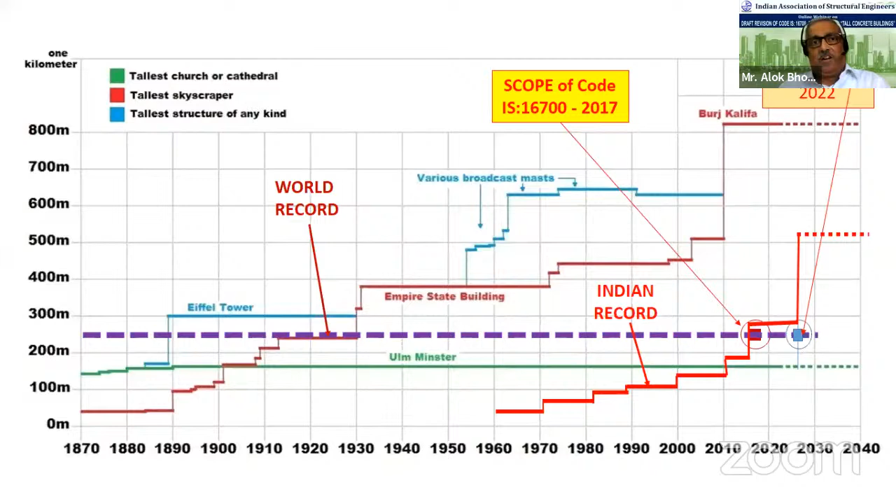With this brief background, let me come back to today's agenda. The objective of this webinar is really twofold. Firstly, it is to apprise the participants, who are mostly code users, of the modifications that are proposed in the code, which is currently in wide circulation. The aim is to go into the details of the proposed changes, collate all the comments and observations made by the panelists during this panel discussion today, and forward all the observations to the BIS code committee for their consideration.

The second objective is to discuss broadly the expectations of practicing engineers and code users for future growth of this code. The buildings are going to be more and more complex in shape. We know that we have very little control on the shape of the buildings that are coming up, particularly in the tall building sector. We are seeing many twisted buildings on the horizon, and we have no way to stop this.

The only thing is the structural engineers, we can no longer be a kind of a roadblock or a stumbling block in the progress, and keep our codes restricted, thinking of only what capacity we have. I think it's a question of chicken first or egg first. And this is a debate which I think in the panel discussion we will also discuss. What is the future of the code?

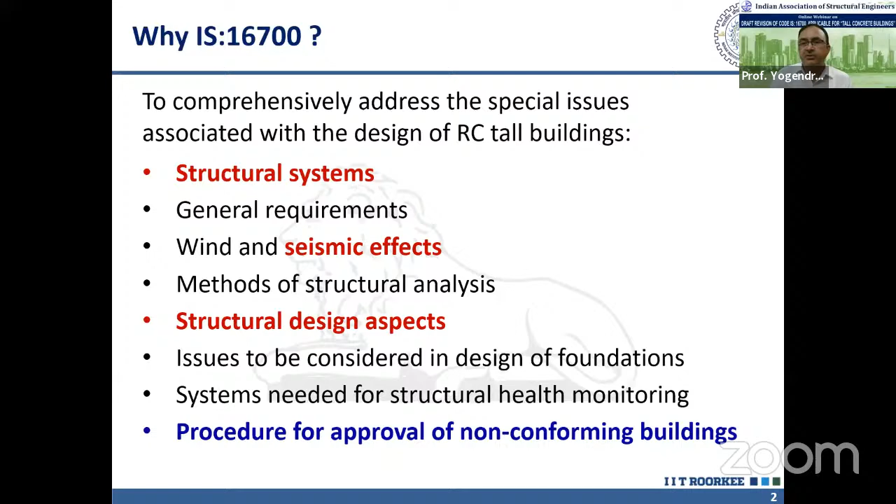So also what this code does not cover is specified in the scope. This standard is not applicable for tall buildings located in near field of seismogenic faults. So what is near field? Which is within 10 kilometers from the known faults. And there is always a query: how do we know where the faults exist in our country? So I can inform here that the Geological Survey of India, GSI, has published a seismotectonic atlas of the country, and that atlas gives maps of all the known faults so far. So from there we will come to know where these faults are and whether our building or any other structure is in the near field, within 10 kilometers of those known faults.

So the code says that in that case it is not applicable. But what exactly is to be done when it is within those 10 kilometers is not very clear from the code. One thing which is to be done is that in near field we have to go for site specific hazard assessment. And as far as I think, the rest of the design considerations will remain the same. The only thing we have to keep in mind is that when the building is within 10 kilometers, we have to go for site specific hazard assessment.

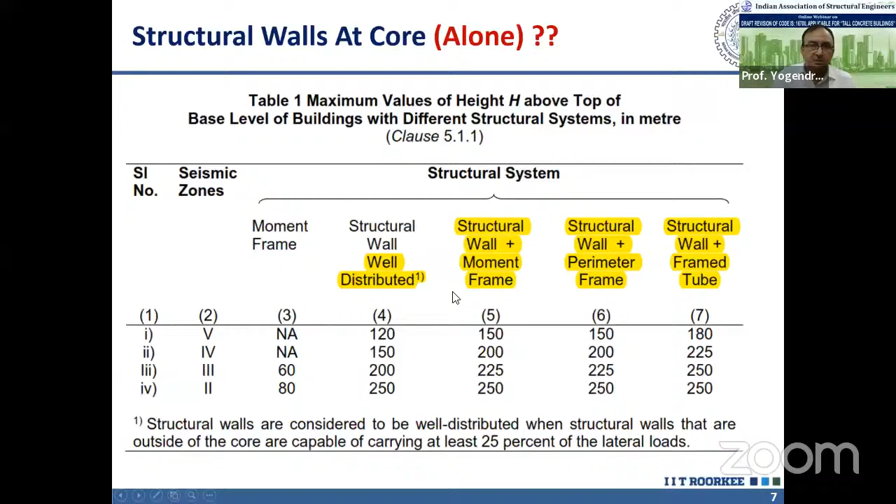The source of this formula is ASCE 7-22. In ASCE 7-22, different types of structural systems are identified, and the two systems taken here are concrete moment resisting frames and all other structural systems.

So the same expression is multiplied by a coefficient Cu, which depends on the seismicity. For PGA greater than 0.3 and 0.4 G, these values are 1.4. So in proposed IS 16700, this value of 1.4 has been chosen, and accordingly these two expressions have been given. The commentary of ASCE 7 also provides the basis for how these values of 1.4 to 1.7 are to be chosen.

That depends upon the seismicity of the area, because in less seismic areas, the sizes of the beams and columns are expected to be smaller. The building is expected to be more flexible, and as a result, the period will be longer. And this larger multiplication factor is allowed.

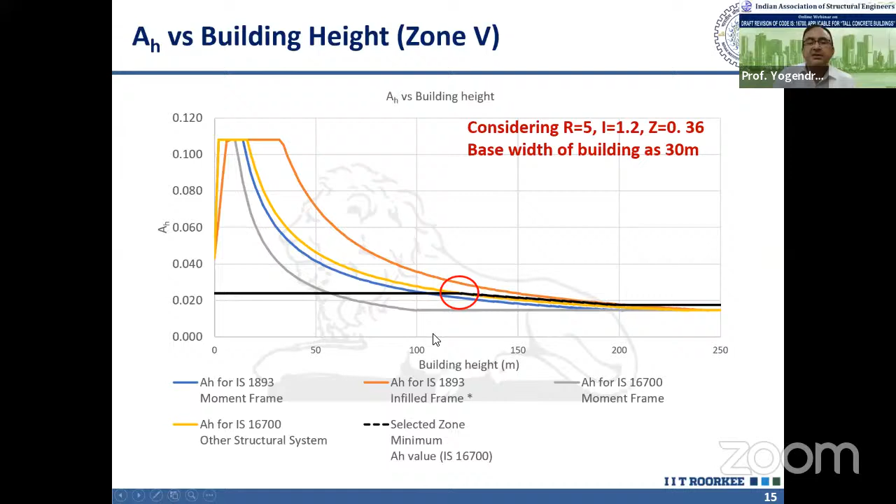Then there is an issue of what will happen just at the 50 meter mark, because less than 50 meters IS 1893 is applicable, and beyond 50 meters it will be IS 16700. So we have to look for similar changes in IS 1893 also, so that the design from the two codes is consistent.

And in this regard, if we are using 16700 for buildings less than 50 meters, as the code says, actually it is not adding value, rather it is reducing the design force for buildings less than 50 meters.

We can do a little simplification, and if I rearrange these terms, actually the origin is from ASCE 7 again. In ASCE 7 there are two limits given on interstory drift - one coming from the stability point of view, from the P-delta effect, and the other coming from the damage point of view.

So this stability limit, if I rearrange a little bit, it becomes delta-i by hi, where delta is the interstory drift and hi is the story height. So it becomes the interstory drift ratio, which is given as 0.4% in IS 1893.

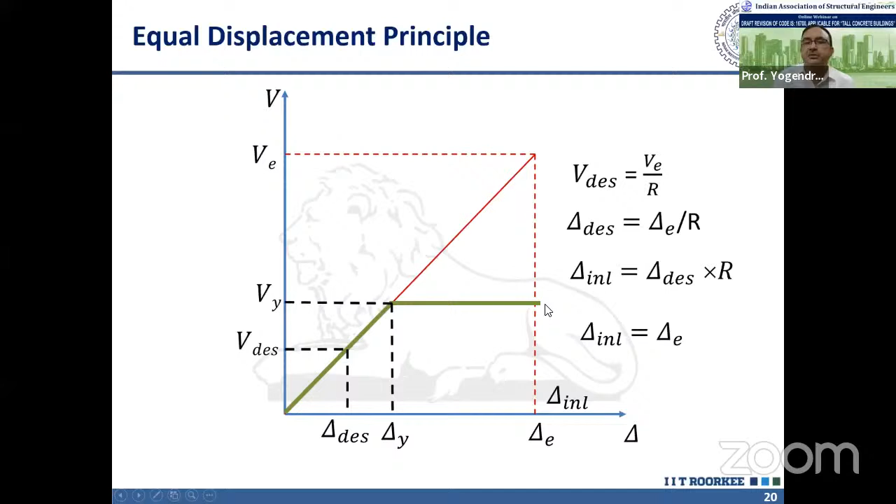So it is my understanding, looking at the code, that the code has confused between the two drifts - one is the inelastic and another is the design. In our code, we are dealing with the design drift which comes for the reduced force, whereas in ASCE 7 it is the inelastic drift, and using equal displacement principle, this inelastic drift comes R times the design drift, and that's why it is perhaps required to remove this R from here.

In case of ASCE 7, another drift limit is provided, coming from the control of damage, and for all other structures, depending on the importance, it varies. The inelastic drift varies from 2% to 1%. So if we take the limit of IS 1893, 0.4%, and multiply it by R, then that becomes equivalent to 2%, whereas in case of ASCE 7, it is also equal to 1% for important structures.

And this will depend upon also what type of partitions are provided, how much damage is acceptable in the structural and non-structural components. So something similar we have to provide in our code.

To conclude, three changes perhaps we can recommend in this revised draft. One is the freedom to select the structural system. Currently in our code, the structural system is binding - beyond a particular height, we cannot use a particular system, although there is no scientific basis for that.

As we know, Taipei 101 is a mega frame building - one of the world's tallest buildings has been using the concept of the frame. So there should not be a limit. There should rather be a suggestive range, that in this range this type of structural system is more economical or more viable. That type of recommendation can be there in the code.

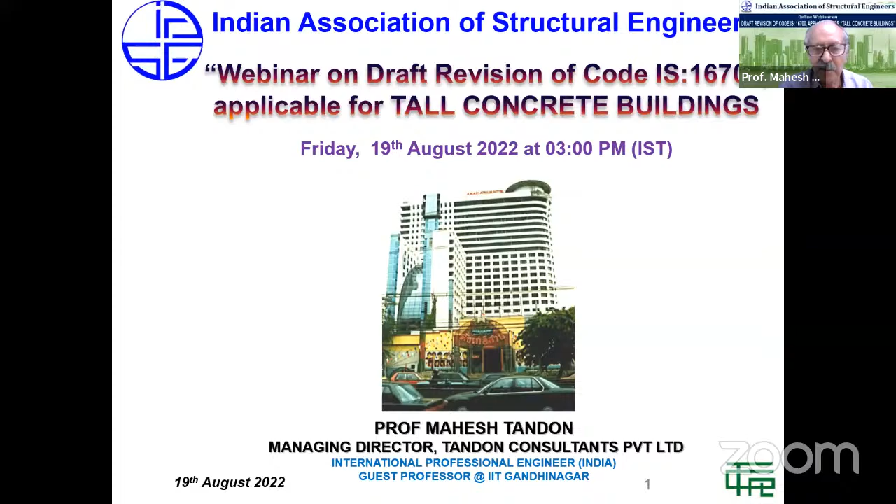Okay, thank you. Thank you very much, Alok, and good afternoon to all the participants and my fellow panelists. I will limit myself to these two chapters, although I would have liked to discuss some other things also, but I'm sure we'll get a chance to discuss those at the end after all the presentations are made. So the first thing is, without too much repetition, this is part of the code on structural walls.

This part has been removed from the code. This is the old code which I'm showing you, and I will show you the new code. So this vertical column has been eliminated.

The other thing, as you can see here, that has gone for a wall. The other thing I would like to say is that they should reconsider the nomenclature which they have put here. Whatever nomenclature they want to use, my suggestion would be to use a nomenclature which is generally known and published everywhere, and there should be a figure which describes what we mean by all these nomenclatures.

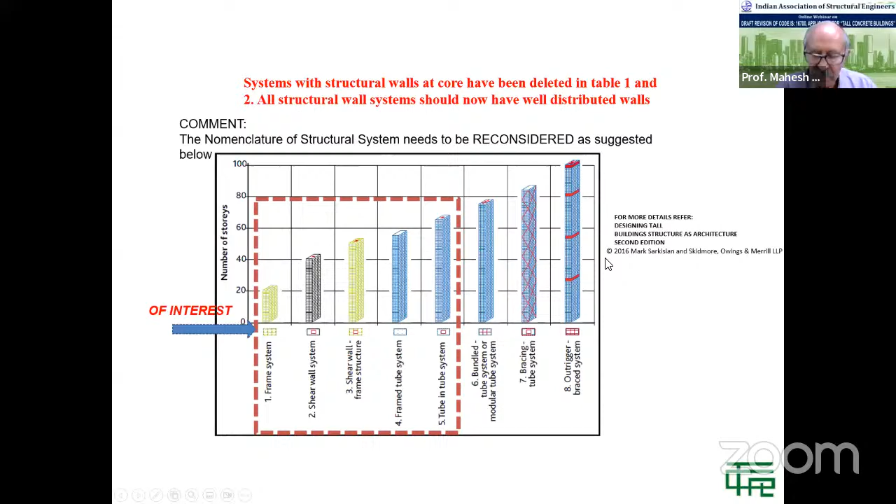You see this building, for example, you have very closely spaced columns on the cladding or on the surface of the structure. And if you see it in plan, there is the core, which also has a function, and you've got very closely spaced frame columns, as you can see here. Of course, every floor you have a connection. So it's a different type of building, it's not merely some frame building. This is what we need to use, the wordings which are commonly understood, and also give a diagram of what they look like.

I think Professor Yogendra Singh mentioned about this drift under natural conditions, yeah. So the change is that it used to be a return period of 50 years when calculating natural drift, and now they have made it 20 years. I have looked at the international codes of practice, and it seems to be more or less okay, whatever change they have made.

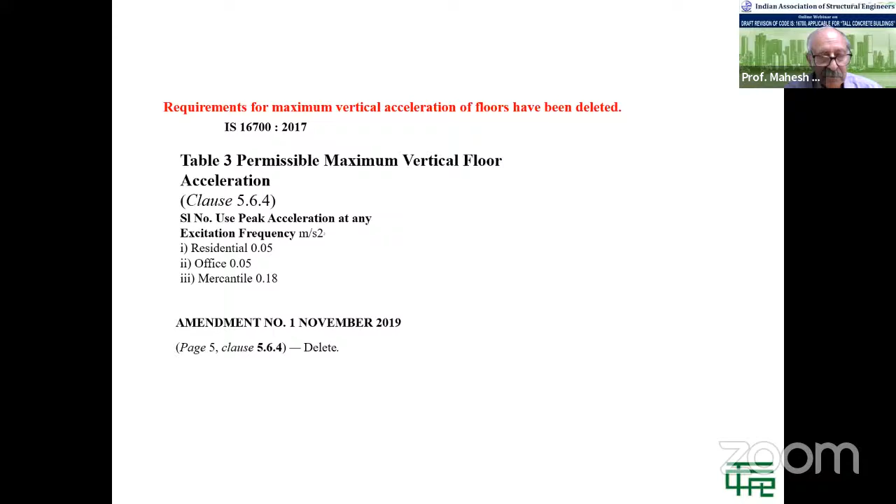The other thing that has changed is the lateral acceleration limits for residential buildings. The peak combined acceleration was 0.15 meter per second square in the old code, which has been made into 0.18 meter per second square in the new code, which means it has become a little more liberal to the extent of the limit.

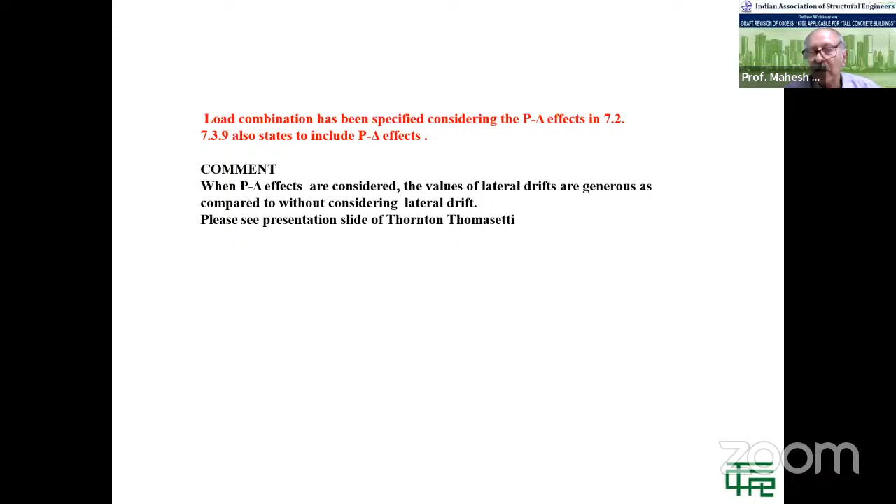I have already talked about the P delta effects. It's actually outside my terms of reference, but in 7.2 and 7.3.9, they also said to include P delta effects. But when you consider P delta effects and when you don't, these two have to be treated separately, and the return periods and the limits have to be defined properly.

So it should be specifically mentioned that this clause 6.2.2 applies only when you have buildings which are mentioned in 6.2.1, which means complexities in plan, site complexities, and so on, and natural period greater than 5 seconds. Only in those conditions can you neglect what is in IS 875 and use 70% of that if your wind tunnel tests are giving you lower results. Not in every condition where you do wind tunnel tests. So the wording has to be improved. That is my feeling.

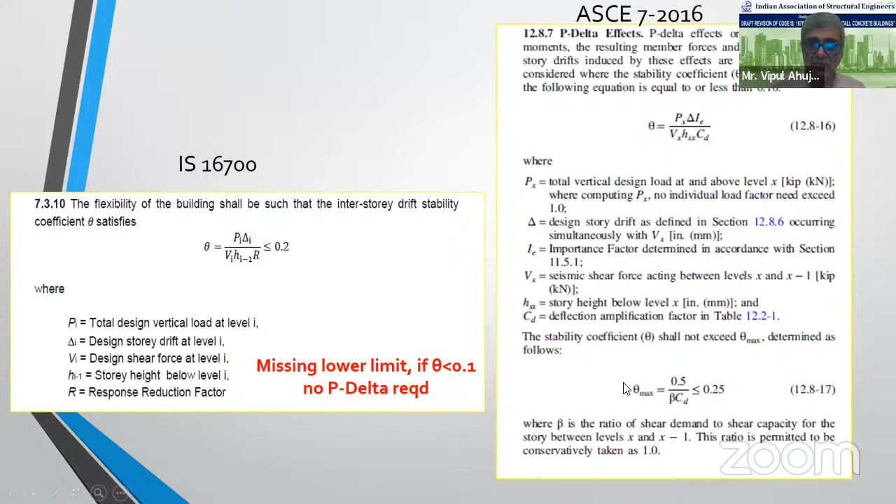Okay. Whereas what Professor Singh was saying, they have the Cd over here, which is somewhat close to half of the R value. So something similar to what we are looking at is already over there. So maybe this requires a little discussion, and then we'll all be on the same page. But if there is a problem, then indeed we should take care of it.

And then of course, for columns we have different conditions, for highly axially loaded or flexural. There's an equation here also for columns for highly loaded and less loaded, and for coupling beams also there are different scenarios. So we need to really compare a little bit, and it's not such a simple result that we'll get out of this. Then we'll talk about modeling of soil, which is mandatory if there is an extended basement, like a backstay model.

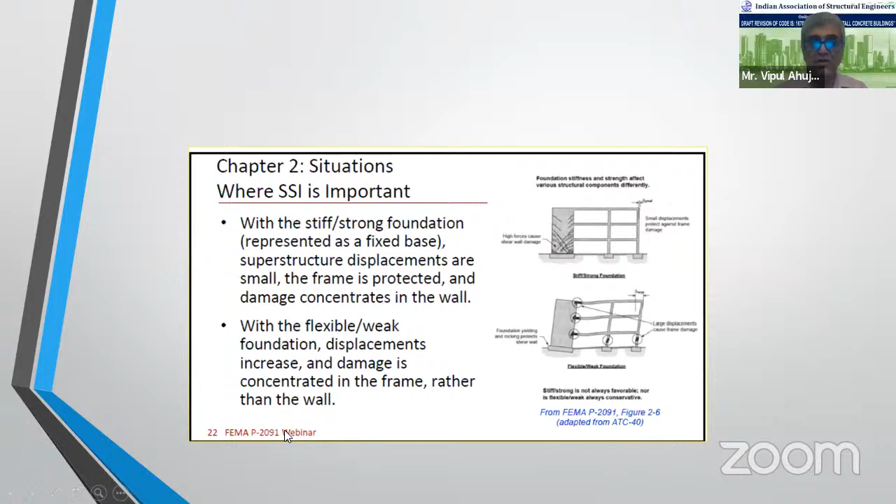And if you have a very flexible condition in the soil, all the force goes away from the wall, the wall simply rocks, and then you have all the failures happening in the beams and columns, like shown over here. So we refer to FEMA P-2091 for this condition. So these are special conditions. So for a stiff building, for the wall you get this kind of displacement. Then in addition, for soil structure interaction, you get this additional delta R.

So here's a rule of thumb which is also given in FEMA P-2091, a small equation that you can easily check to see when soil structure interaction is important. H is the height of the building, Vs is the shear wave velocity at that site, and T is the time period. So for this building, they plug in the numbers and find that this equation gives a value of 0.11. Therefore, they conclude that the soil structure interaction inertial effects are likely to be significant.

Okay. So then we jump into 7.3.11, where it says you ignore the stiffness of the gravity elements. So here we want to say that you want to add deformation compatibility. Yes, we ignore it, but then we also have an additional analysis. For example, you have a flat slab, and I pin both the top and bottom of all the columns for the first run where I ignore the stiffness of the gravity elements. But in the second analysis, I put it in, I multiply by R as it's given in 1893, we do the deformation compatibility, and then we pick up the moments and axial loads from that second model.

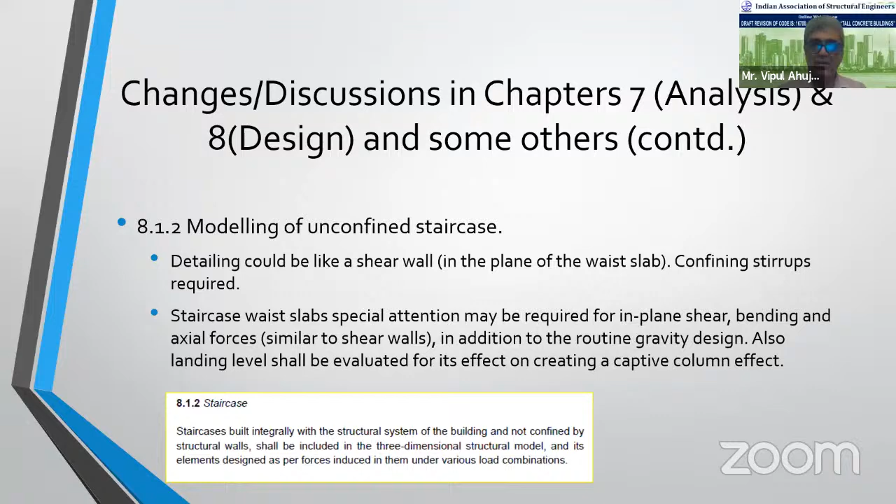So this is a very important feature, and it could mean that we even design the waist slab with stirrups, just like an in-plane beam of sorts, or an inclined 45-degree or 30-degree shear wall. And then it has tension and compression parts also. Tension and compression are on opposite faces. Steel is there.

Then we go to 8.1.3.3, which is towers connected by a common podium. So we say that basement expansion joints not continuing from floors into retaining walls is not effective in dividing the building structurally, which is a very common practice because people want to avoid leakages. So the practice is the joint is provided only in the floor, not in the walls. But this effectively increases the backstay effect.

Okay, so it is wrong to idealize the building with only the relevant part of the basement and not with the entire basement unless you run the expansion joint through the wall, right to the foundation. So these are the things, and then transfer structure shall be not provided in. Okay, then there's another one, the K part. There's this paragraph C and then this paragraph K.

So I say add overturning moments obtained from the respective towers. It just says overturning moments obtained from the response spectrum analysis. So we should add this term of respective tower, because if there are 5 towers in the basement, I will look at the overturning moment of each of the towers respectively, and not club the whole thing together. So from the direct load path model, from there we look at the overturning moments.

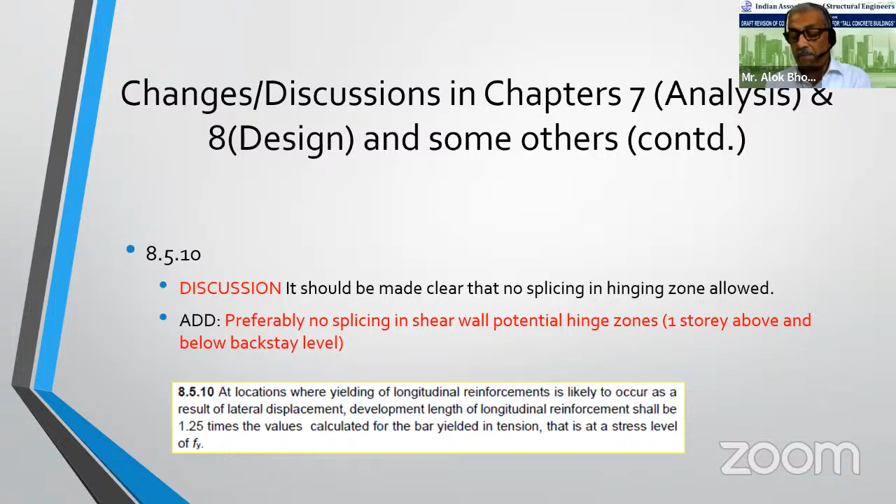Then redundancy requirements, 8.5.12. So I say you add: if the resulting system is not satisfactory, the structure shall be designed to resist 30% greater lateral forces. Here's the redundancy clause. There is a requirement for each story resisting more than 35% of base shear. That means if you take the sum of the shears from above and more than 35% is being taken by that particular story, then the code says that for any wall with a height to length aspect ratio of more than 1, you take that out and that should not cause torsional irregularity.

But of course, I am unclear about this word "story above", that you take out only the walls from the story above. So this is something to be debated, I think. I think it should be right from the bottom to top, that if it's taken out, you should not have a torsional irregularity. But nonetheless, it says if it's torsionally irregular, then that's not allowed.

But actually what ASCE 7 says, and it has this redundancy clause, I've stated that clause also, is that if you take it out and that doesn't work, then you design it for a 30% higher lateral load. It doesn't give you a death warrant. You can design it for 30% higher load. And that is a redundancy clause which is across the board. The rho value may be 1.3 or 1. With every clause used in ASCE, 1.3 is required unless you have some exceptions. So this is one of the exceptions we should be aware of and not copy blindly.

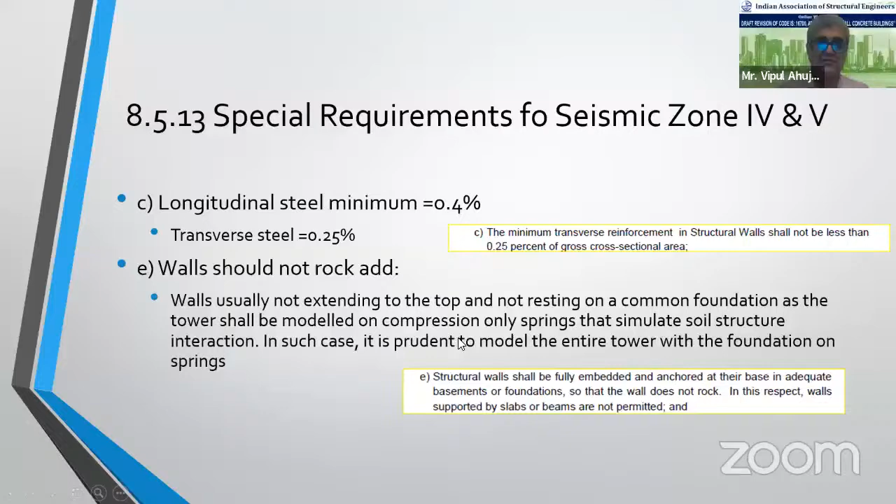So again, we bring in the point of soil structure interaction, and we model the foundation there with compression-only springs and simulate the soil structure interaction. So then I just took a little brush at the non-structural components. I think this part can be added there.

I heard a seminar of RWDI, and they were talking about the imperceptible range of vibration affecting sensitive equipment like MRI in hospitals. Those are on air springs, and these things are not covered in our standards. I think it would be a good idea to put that in.

Then in the structural design review panel, in my opinion at least, even though outside my charter, it says that the structural engineers reviewing on the panel should have at least 10 buildings of height 150 meters and more. So we took a poll here, and nobody in the NCR at least has that. It is unfair actually. Suppose it's a 30-story building being debated, then at least, if not 100%, 80%, or some number that can be discussed, of the height under this seismic zone.

That means if it is zone 4, then at least 4 or 5 we should have done, with performance-based design. That is fine, but just killing the whole community, not having that kind of experience at the moment; this will gradually go up over time. So this is the summary of all the things I have said. I'm not going to read all this again because this was for later on. We'll come back to this. But essentially, all the points that I've talked about.

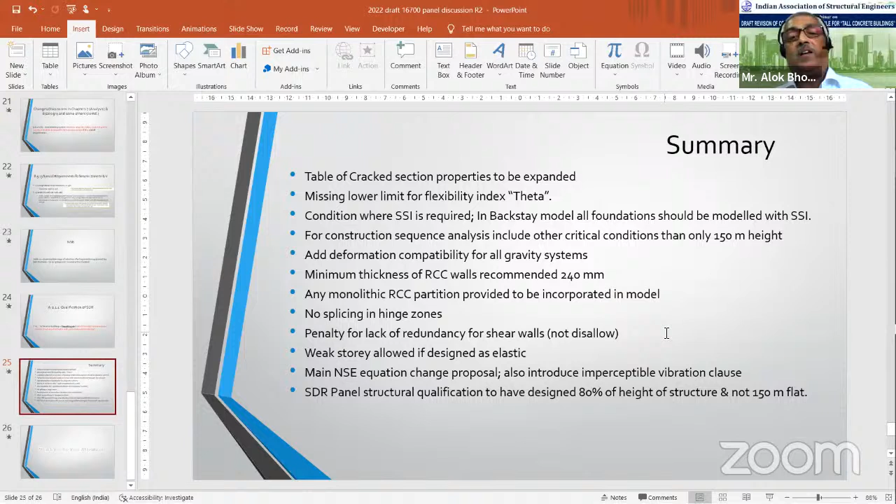Mr. Girish Dravid is currently the director of one of the most prominent structural engineering firms, Sterling Engineering Consultancy Private Limited. He is responsible for many high-rise buildings in India, including the tallest building, I think, in India, the 320-meter Palais Royal in Mumbai, more than 25 buildings with height more than 200 meters, the 8 million square feet Dhirubhai Ambani International Convention Center, built in RCC and structural steel, and many other offices. So he's basically a tall building guy, and I look forward to hearing from him. Over to you, Mr. Girish Dravid.

Kindly put it in the presentation mode. Yeah. Can you see my screen?

Yes. Okay. So the format of the presentation is such that we were given a few chapters to concentrate on, and I believe I was the last one to choose, and I got to talk on chapters 9 and 10, which deal with foundations and non-structural elements. Being a structural engineer, when I look at chapter 9, foundations, most of the clauses look to me to be prescriptive, and there is nothing that I as a structural engineer can add.

So far all the speakers have presented some kind of theory or their opinions on equations and all those things, but here I may not be able to do all that because most of the clauses are prescriptive. I tried to talk to a couple of geotechnical engineers in Mumbai and ask their opinions about these clauses, but they could not come back in time, or I don't know whether they have any explanation for these. So my task is really simple. I'm just comparing what was there in the old code, that is the 2017 version, and what is being proposed.

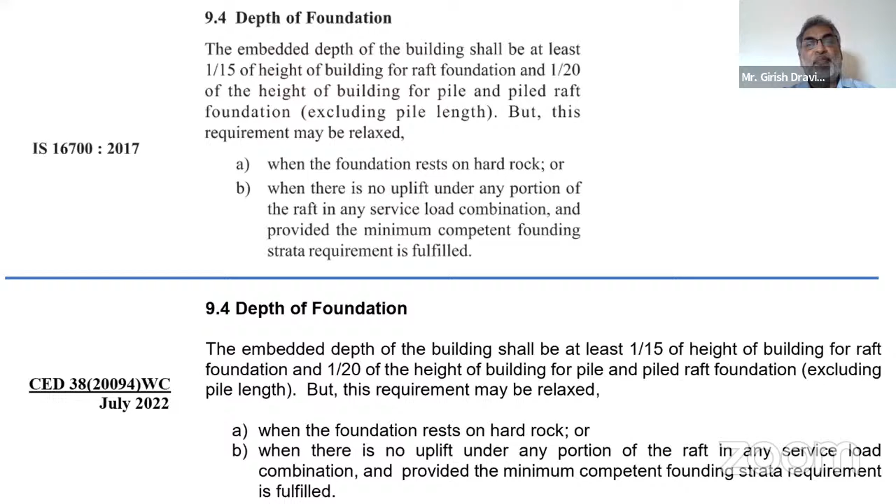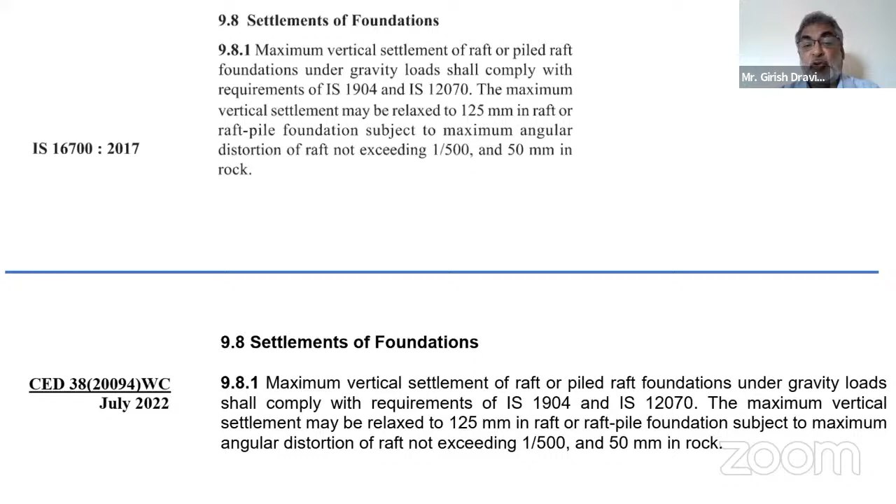No change again in the settlement of foundations. The limits are exactly the same. Again, they are reasonable, and we have found out that in certain conditions these limits really are reached in soft soils and rocky soils as well.

So that was foundation. I don't see any particular thing to discuss again because those are prescriptive clauses. And coming to non-structural elements, Mr. Vipul Ahuja has covered a very important thing about acceleration at a particular floor given in ASCE 7-22. Basically, there are no major deviations.

Coming to this equation, this is what Mr. Ahuja was talking about. And in fact, he interacted with me today morning or yesterday, and then I went to ASCE 7 and actually saw that that new expression in ASCE is really more relevant than this. So our code committee should look at this expression and attention should be given to ASCE 7.

No other change that I see, except that table numbers have changed. Of course, all readers might have noticed.

I think that this Indian code for tall buildings, it is specifically written that this code has been circulated to members of Civil Engineering Division Council and Special Structures Sectional Committee. But all us structural engineers always face a problem in convincing architects or clients or MEP consultants that we have to use this code. Although prescriptive, there are certain theories behind them, and also there is experience, there is judgment, all that is there in following this code.

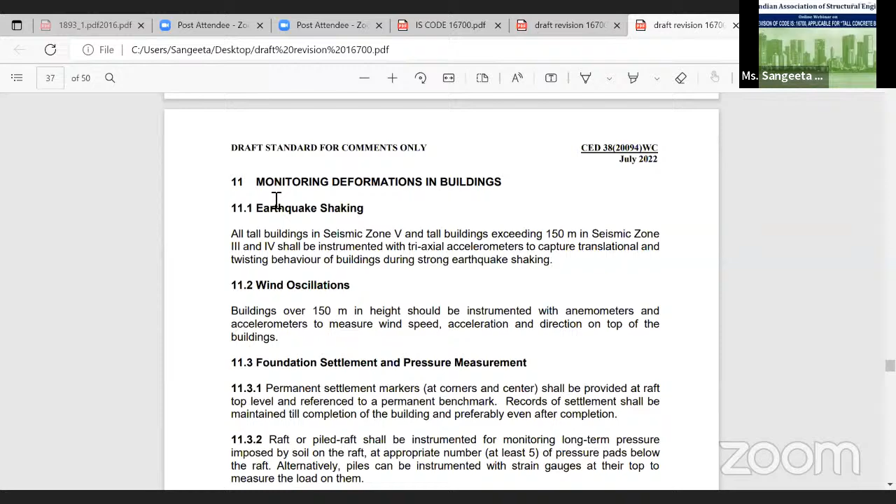Okay, and I would love to bring everybody's attention towards clause 11, where I don't see any major change from the earlier code. This is what I'm showing you in the draft which has come out for revisions. I think it's important for us to note the guidelines for the approval process for design of concrete tall buildings not conforming to the prescriptive requirements of this standard. This is a very important subject which probably most of us may not have looked into in detail, because we may have thought that this is code exceeding and we are not working on any code exceeding projects.

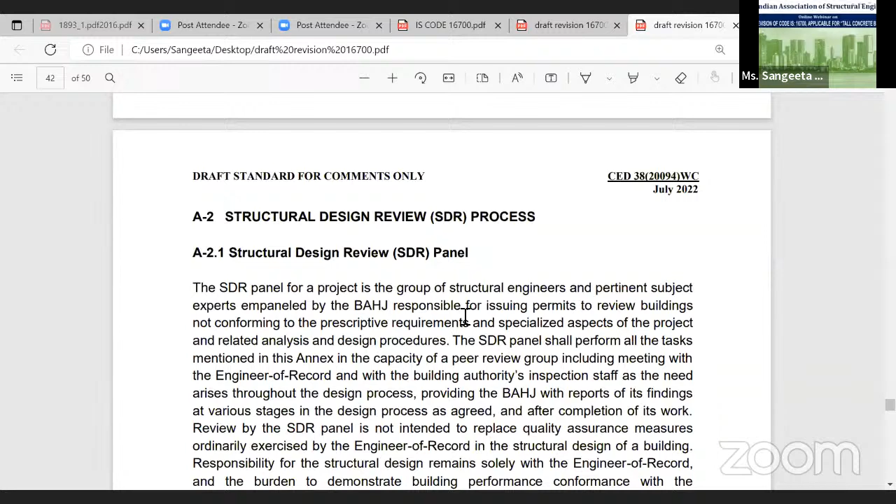So I want to bring your attention to this special table here, which lists out a generic format of checklist for code exceeding buildings. Other than the table, there is in this annexure a very well-defined structural design review process, and the composition of the SDR panel, which Vipul has already pointed out—that probably the qualifications of the SDR panel members may be reviewed before the draft goes out for circulation, as most structural engineers that I know of may not qualify for having done 10 buildings more than 150 meters tall. That I think is a bit of a tall order.

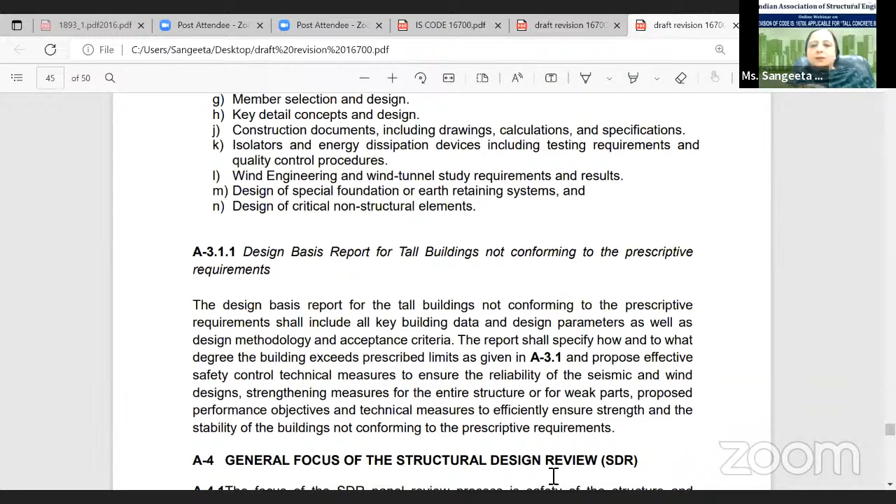Then there is a very detailed description of what kind of submittals need to go to the SDR panel, and what are the requirements needed in the review process, and what are the focus areas where the review process has to look into. However, I don't see any major revision here, and I don't see any particular area where I would love to talk to you except this table.

Now, please patiently allow me to read out to you the conditions that we are talking about. These clauses are defining which project is going to be a code exceeding building. Is the building height greater than 250 meters tall? If the answer is yes, it is a code exceeding building. Similarly, if the building is located less than 10 kilometers away from any seismogenic fault.

Now, whatever explanation our learned professor gave in the beginning, I still feel it is humanly impossible for me to determine if my project, let's say in east of Meerut or East Moradabad, qualifies to be in this category or not. We still do not have reliable published data for me to be able to pinpoint and prove to my client that yes, this building is now a code exceeding building. So I think we need more information published, more authentic information. Maybe BIS can add a couple of graphs to the code, or bring out an annexure showing pictorially the seismogenic faults, so that we should be in a position to locate our project on that map and check whether it lies in that 10 kilometer region or not.

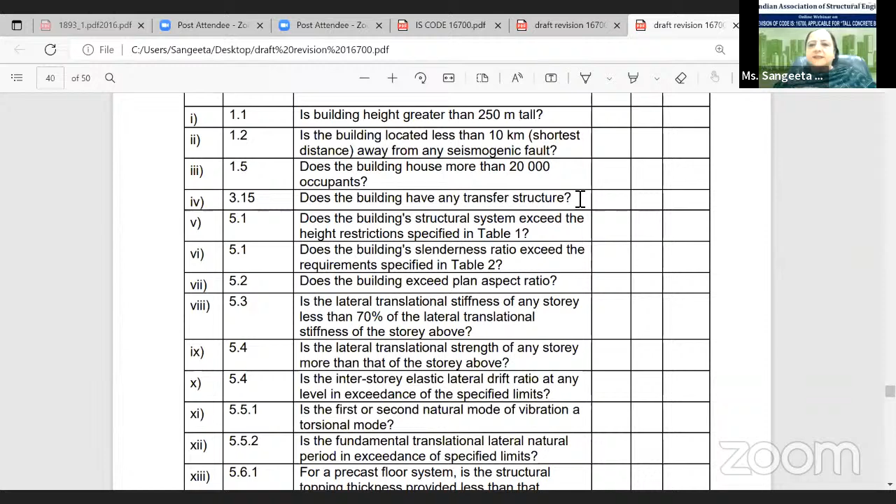Everybody knows there are thousands of buildings all over India where transfer structures have been provided. Now, do we understand that a transfer structure in a building automatically makes it a code exceeding building? If yes, then I have multiple examples in mind.

Does the building structural system exceed the height restrictions specified in Table 1? This table tells us not to use a moment-resistant frame in Zone 4 and 5 for buildings more than 50 meters in height. How many buildings do we know of personally, maybe in thousands, which will fall into this category, which now has become code exceeding and needs to go through an SDR panel review.

Now, does the building slenderness ratio exceed the requirements specified in Table 2? Does the building exceed plan aspect ratio? All this has been covered earlier by Professor Tandon.

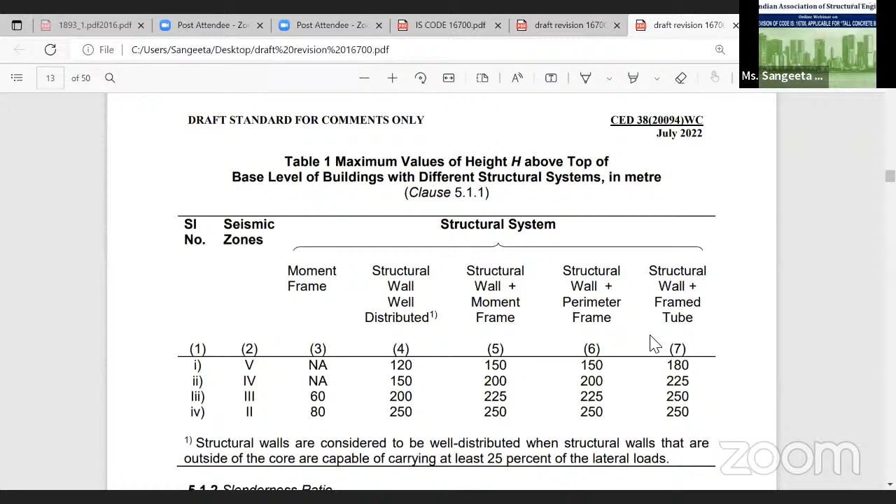Table 2 gives the maximum slenderness ratio, which is the height to width ratio in a building. Personally, I think I've seen buildings exceeding these slenderness ratios, and I'm sure most of us may have come across buildings in that category. Similarly, in the plan aspect ratio, the maximum length to width ratio of overall building should not exceed 5.

So if the answer to all this is yes, then definitely our buildings will fall into the category of code exceeding buildings. Now, this puts all our buildings into a danger zone, a zone where we need a special review, even for existing buildings. Although the code does not mandate that for existing buildings, I'm sure all of us are genuinely concerned about the non-conforming and code exceeding buildings already existing.

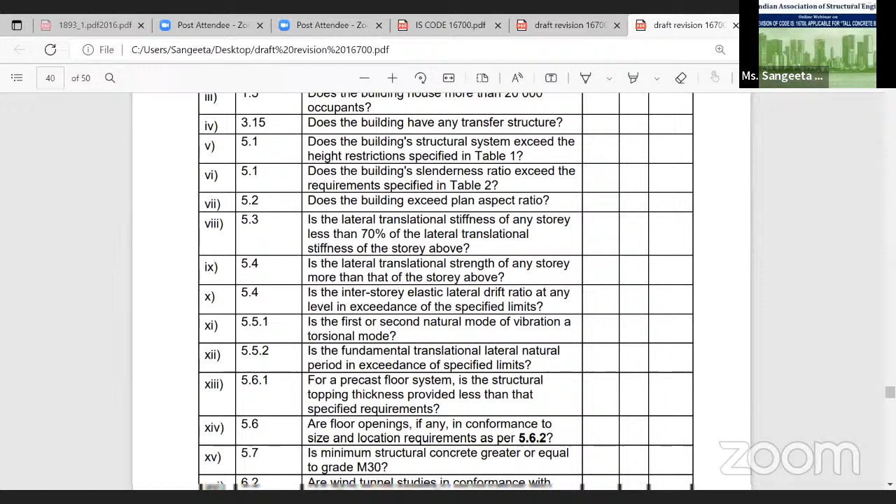Now, we were looking at the plan aspect ratio. The next point is: is the lateral translational stiffness of any story less than 70% of the lateral translational stiffness of the story above? I don't want to talk more about it - we've seen ample buildings, especially these stilted buildings dotting our landscape in NCR. Even in Zone 5, I've seen buildings where stilted floors have been constructed.

Even though the height of our metro stations may not be 50 meters or above, most of our elevated metro stations fall into this category of clause number 8. Is the lateral translational strength of any story more than that of the story above? If yes, again it's a code exceeding building. Is the inter-story elastic lateral drift ratio theta exceeding the specified limit as per clause 5.4? If yes, it's a code exceeding building.

Is the first or second natural mode of vibration a torsional mode? My God, I've reviewed personally so many buildings where we had to point it out to the designer that the building is going into torsional mode in the first mode itself. I think this is a very important clause and all of us must take note of it.

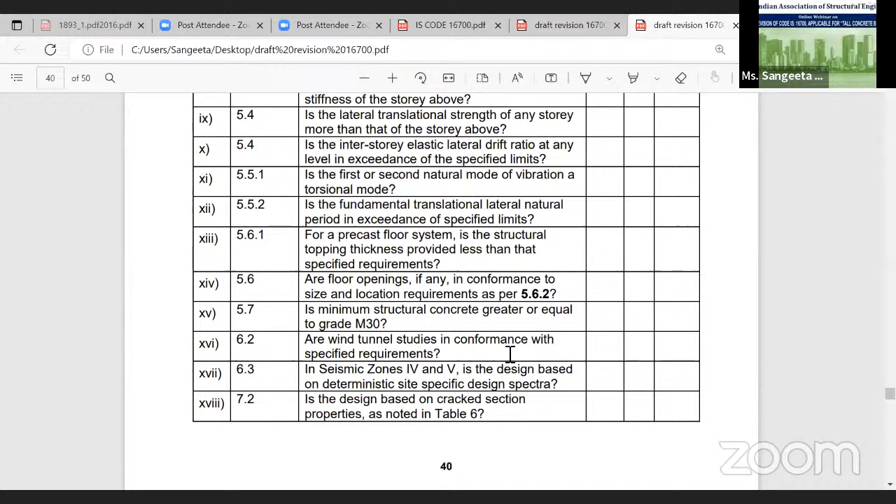Is the wind tunnel study in conformance with specified requirements as per 6.2? If no, we need to be worried. In seismic zones 4 and 5, is the design based on deterministic site-specific design spectra? Well, the answer may be no to many projects, simply because in India we still do not have this kind of data available for any major project happening. And I don't think we, as structural engineers, are given ample time to do more R&D and come up with reliable site-specific design spectra. It definitely needs more research data to be available.

And next clause: is the design based on cracked section properties as noted in table 6? Well, I think we all agree on this, and I don't see any problem. All of us are following this. And is the stability coefficient less than or equal to 0.2? If not, it's a code exceeding building again.

For projects with multiple towers connected with a single podium, are the requirements specified in 8.1.3 satisfied? Well, I think the most serious drawback that I can foresee here is that you have to do double analysis, if not more, as Vipul pointed out, that you may have to do 2 into 2 times analysis, one with towers separately and the other with all the towers combined with the podium. I doubt if our systems are geared to handle this complex model and run it. It may take days altogether to complete the structural analysis of one such project.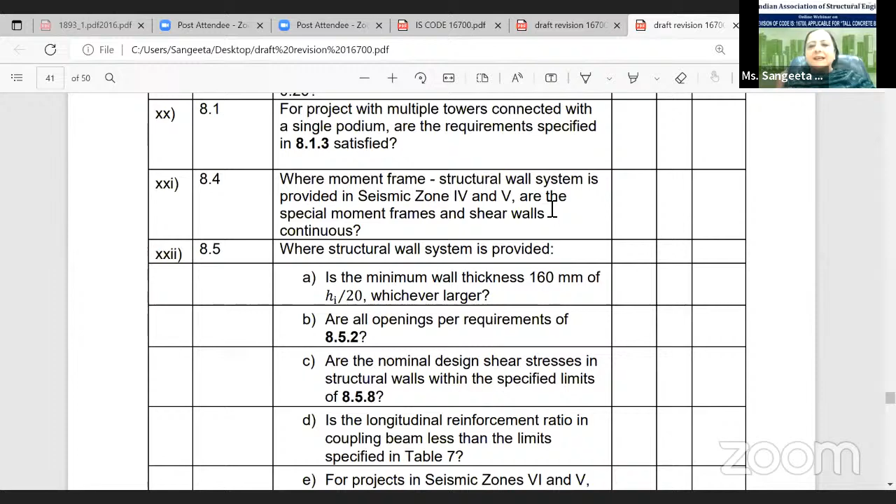Where moment frame structural wall system is provided in zone 4 and 5, are the special moment frames and shear walls continuous? Now, I think we need to deliberate a little more in the committee on this clause, because in table 1 we have simply categorically disallowed moment frame system. And if we are allowing a system where moment frame and structural wall system is sharing the lateral load, we may need to either specify at least 75% as given in 1893 part 1 to be shared by the shear walls, or make it clear as to what ratio of sharing will be acceptable.

And these are again the criteria for wall thicknesses. As Vipul pointed out, 160 may not be the right thickness as the minimum thickness. And if the openings are not as per 8.5.2, if the nominal design shear stresses in walls are not as per 8.5.8, and if the longitudinal reinforcement ratio in coupling beams is less than limits specified in table 7, and in projects in zone 4 and 5, are the requirements of 8.5.14 satisfied? If the answer is no, we need to take another look, revise our analysis, or be prepared for SDR panel review.

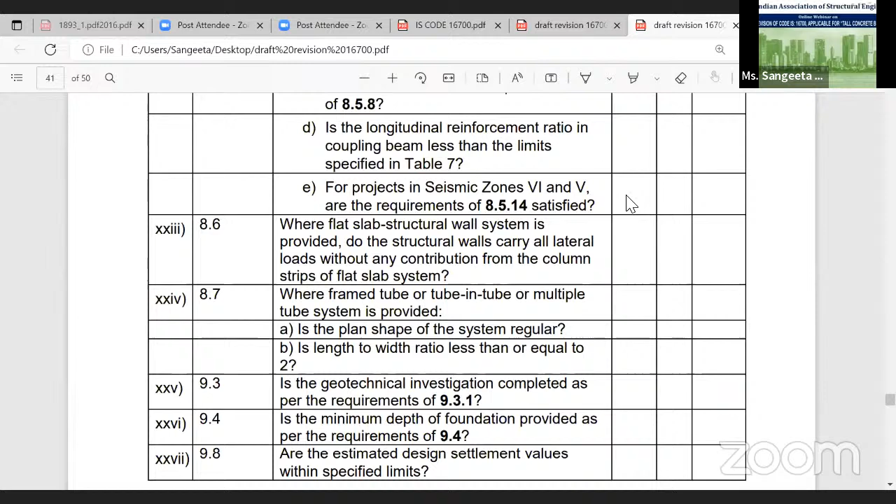So again, we have a clause where we are talking about the lateral load carried by the shear walls in a shear wall flat slab system. I feel we should deliberate a little more on this and make it very clear: if it does not meet that criteria, do we still allow the flat slab system to continue, or do we not? So where framed tube, tube-in-tube system or multiple tube system is provided, is the plan shape of the system regular? Is length to width ratio less than or equal to 2? If the answer is no, again, it's a code exceeding building.

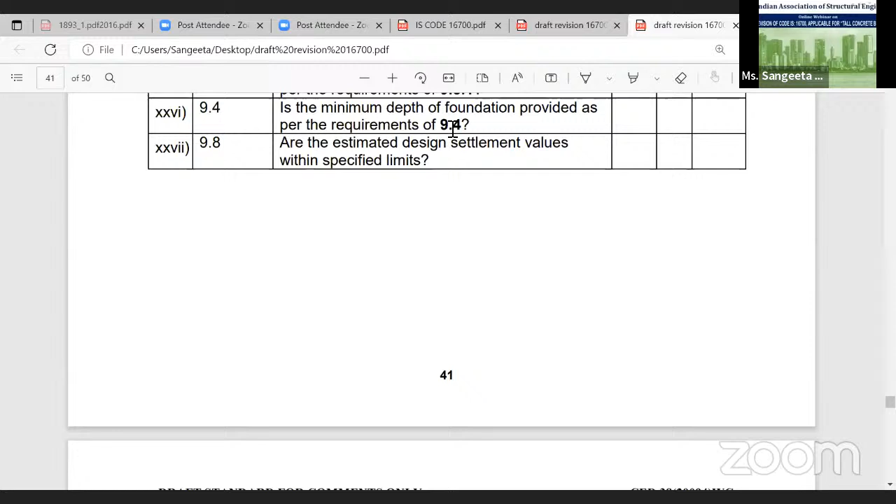And is the geotech investigation completed as per requirements of 9.3.1? And is the minimum depth of foundation provided as per the recommendations discussed earlier by Vipul and Girish Ji? Are the estimated design settlement values within specified limits?

Alok, how much time do I have? Sangeeta, you have already exceeded your time, but please continue.

No, I would like to simply conclude here by making two very important comments. One is, who is going to tell the owner that his project is a code exceeding project? Number one. Is there any authority with the local authorities? Is there any power that has been bestowed on the local authorities to be able to guide a particular project owner? And I think it's now very clear that implementation of these clauses is not going to be easy. So we have to devise a strategy by which these points are taken care of in the implementation. And as earlier pointed out by one of the panelists, I think Rishi, architects are usually not familiar with the earthquake codes and they don't want to be familiar.

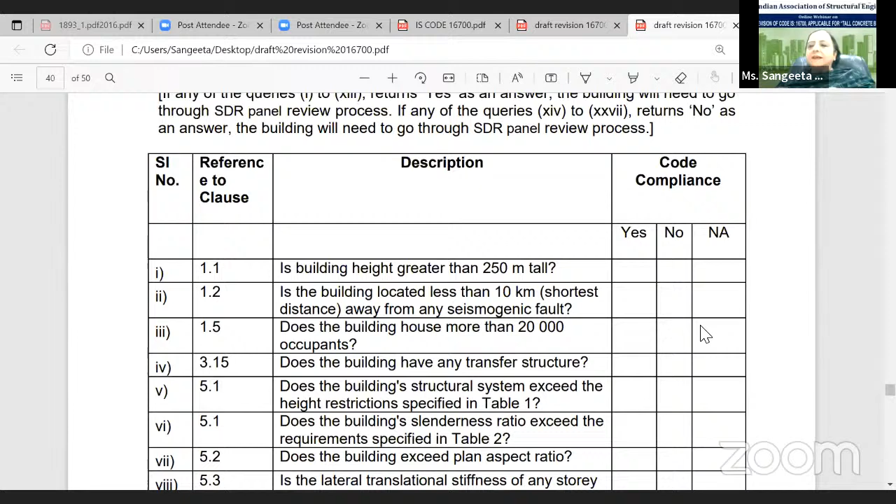I told you in another meeting earlier that when I pointed out irregularities in the geometry to an architect of a particular important project, he got clearly very offended and he told me I had no business trying to tell him how to do his work. So now the crux of the whole thing is the whole geometric planning, the ratio of height to width, the aspect ratio, and also primarily the structural systems, if beam columns can be adopted or cannot be adopted in a particular building in a given zone.

I think we need to somehow involve either the structural engineer in the geometric planning at the initial stage itself, or the architect in the issues that we are discussing today. I don't know how it will be done. I'm just throwing the floor open and throwing the points to my colleagues here. And thank you very much for your attention. Thank you. And questions are welcome.

Thank you. Thank you, Sangeeta. I think you have brought a very important point. Annexure A, which definitely is a very, very controversial annexure. And I'm sure it will be discussed in the interactive session. I now invite Mr. Abhay Ghate, who is the last panelist, to talk about the last annexure, though it is one of the most important annexures, which is Annexure B.

And let me introduce Mr. Ghate first. Mr. Abhay Ghate is attending this webinar from the US, so it must be around 6 a.m. in the morning. So thank you very much, Abhayji.

Kindly share your presentation, sir. Sir, you have this green button below. Share screen, green button. Yeah, you just press. Yeah, we are getting it. Yes, it's visible. Just make it in the presentation mode. We are able to see your PPT, but kindly make it in the presentation mode. Mr. Ghate, we are seeing your last slide. Now you are seeing the first slide. If you see at the bottom right, you can click that for presentation mode. No problem, we are able to see your screen, so you can continue.

Okay, let me start with this. This is one of the good codes, and after the comments are incorporated, I would say it should come out to be quite a good code. My first comment is on the recommendation that the plant should have an automatic batching system. My comment is that the plant should have an automatic batching system with moisture sensing equipment, and also the microfine materials should be auto batched. Many plants have auto batching, but at many places we found that GGBS and microfine materials like Alccofine get added manually.

My second comment is on the concrete strength at 56 days. Generally, the strength at 56 days is more than the 28 days strength for mixes with GGBS and fly ash. Random results may vary, but statistically we get much higher strength at 56 days. If we consider 56 days strength as the design criterion, significant economy can be achieved in the mix design. The point is at what stage we need the strength. If we can get the strength in 56 days when the structure is not loaded fully, we can use 56 days strength as the design strength itself.

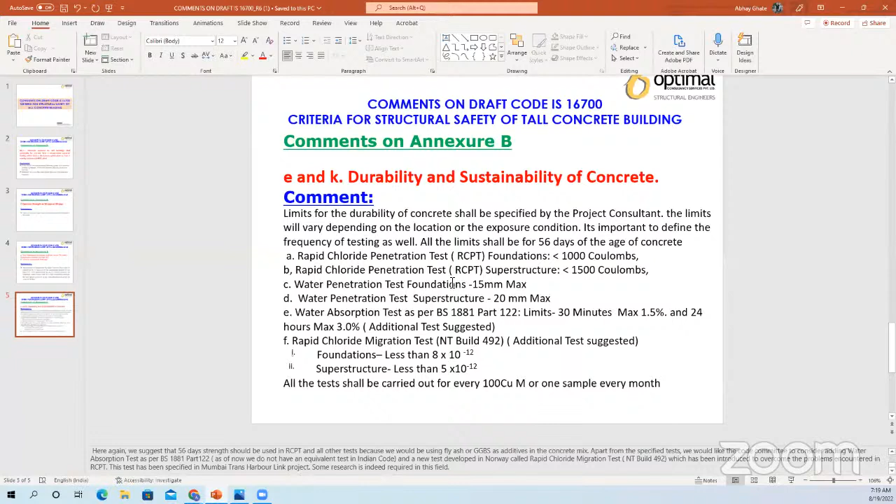Thank you, Mr. Ghate. I think with this, we have heard all our expert panelists and covered all the clauses. Can you please stop sharing, Mr. Ghate, so that we can start the discussion now, the interactive session. The structure of the interactive session will be almost similar. That means we will go clause by clause, and we will invite comments from the panelists, as well as see the Q&A box. I request all the panelists to kindly have a close look at the Q&A box, and when we discuss a particular clause, if there is any specific question any of the panelists wants to take up, most welcome. Otherwise, let me now start sharing my screen, and I will open the code itself, so that we can discuss the provisions of the code clause by clause.

Just give me a moment. Are you able to see my screen, or not yet? No, we can see your screen. You are searching something on the computer. Okay. I don't know why it is not becoming visible. Maybe there are too many things open. That is why I'm not able to show that. Or if anybody can open the code. Sangeeta, would you be kind enough to show the code, please? Can you please share the code? I think it is visible now. Okay, fine. It is visible. So let me start with the first clause. I don't know why it is running so. Is this mine? No, it is Sangeeta who is doing it, I think. Sangeeta? Yes, it is my screen. Thank you. So you keep.

Okay. So can you just show the first clause, number 1, that is scope? Yes. We start with clause number 1, which is scope. Does any panelist have any comment on the first clause? Well, if there is no comment, then I have some comment. If you see clause 1.3, it says that this standard is applicable only for buildings that house 20,000 or fewer persons. Now, I am not clear as to how this number of 20,000 has come. If any panelist can throw some light on that,

because my understanding is your maximum limit for this particular code is 250 meters. And if you take a residential building with an average storey height of 3.5 meters, then you will get something like 70 stories. And per story, even if it is an office, you can accommodate maximum 80 to 100 people. So if there are 70 stories, you can at best accommodate 7,000 people. 20,000 is a big number, and I don't know where it has come from. If any panelist or anybody can throw some light.

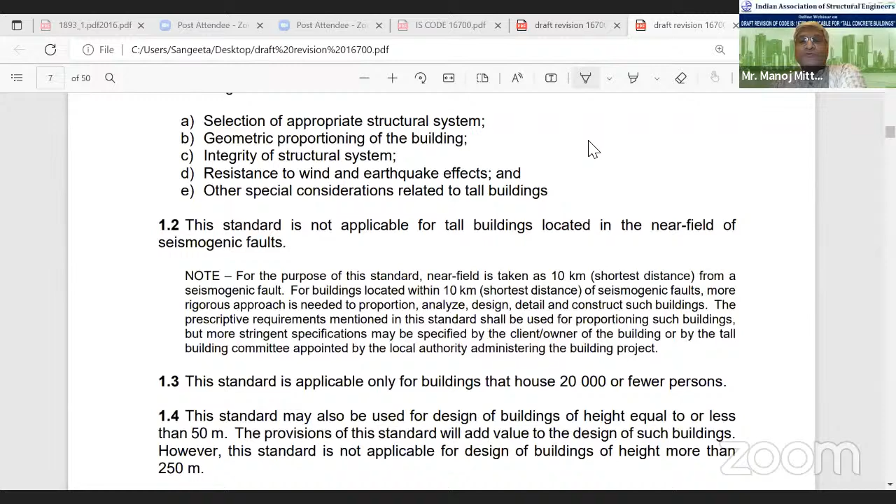Yeah, sure. In 1.3, they say that the standard is applicable only for buildings that house 20,000 or fewer persons. Does it not have any relation with the height? If we read this sentence 1.3, it means if I have any building which has a much higher height than 50 meters and the number of persons living is less than 20,000, does it mean that this code will not be applicable? Oh, if it is less, then it is applicable. If it is more, then it is not applicable.

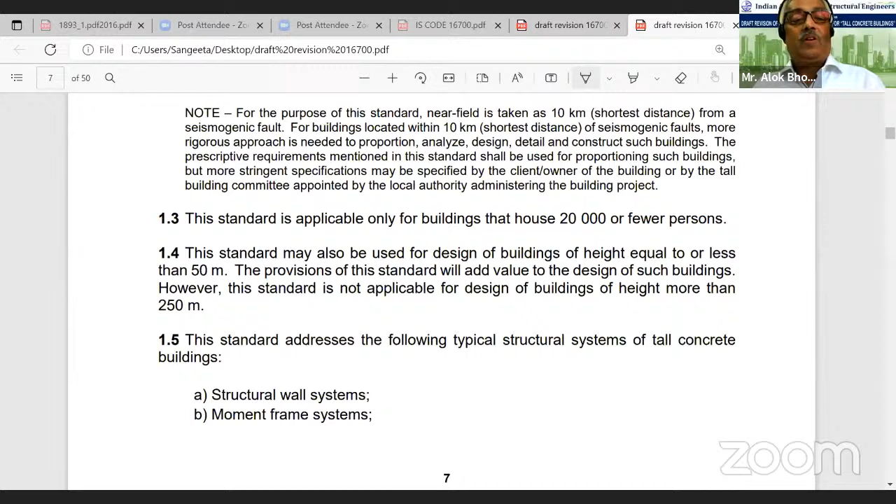In my view, even if 1.3 is deleted, it does not affect the code in any manner whatsoever, or it needs a little more elaboration if there is a background as to why. It is creating confusion actually. Okay, my second point. So can I continue, please? Of course. I have a point here.

Okay. Yes, Vipul. Basically, in ASCE 7, there's a figure C1.5-1, which is a commentary for this, where it shows the importance factor. It shows the number of people at risk, and it also shows the risk category 1, 2, 3, 4, based on which these importance factors have been defined.

And that category is like from 1 to 10 and 10 to 100. It goes on a log scale kind of a thing, and the chart goes up to about 1 lakh. Between 10,000 and 1 lakh, it is risk category 4, which will be importance factor 1.5. So maybe somebody has picked this up from a similar chart, is what I can imagine. Okay, so can we move forward?

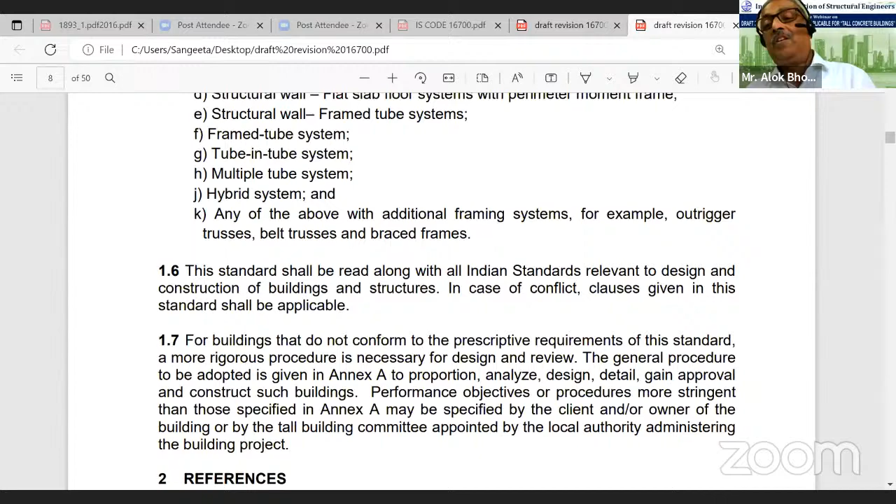If you see clause number 1.5, there are several nomenclatures given, and Professor Tandon mentioned that probably a sketch is better. It would be better if we use nomenclatures which are standard, commonly used. But what I find is many are mentioned here, but if you really go into table 1 and table 2, those do not exist. For example, framed tube system, tube in tube system, multiple tube system are not covered adequately in table 1 and table 2, whereas it is mentioned as if it is part of the scope.

If it is in the scope, then Sangeeta, if you show table 1, should it not figure in table 1 and table 2 as to what are the limitations of height in those building types? Alok, for that, Tandon Sahab was saying that we need to change the nomenclature of these structures. That is one. No, just a minute. I believe they have followed the system given in IS 1893. More or less, they have taken the same nomenclature in this code also.

So any other view? You see, when we are talking about tall buildings, this tube and things like that, that is where they come in. They don't come in normal kind of a... Correct. So they are not there in 1893. Manoj, they are not there in 1893. No. There are certain structural systems which are there in 1893. They have taken the same nomenclature here, and which are not there, they have added some more systems in this code. Right, but the point remains that those additional structural systems should also find a place in table 1, 2 and 3. That's what I'm saying. That is a very valid point, and we should.

I hope somebody is recording our comments, Alok. How are these comments going to be conveyed? I'm recording. You are recording. Okay, good.

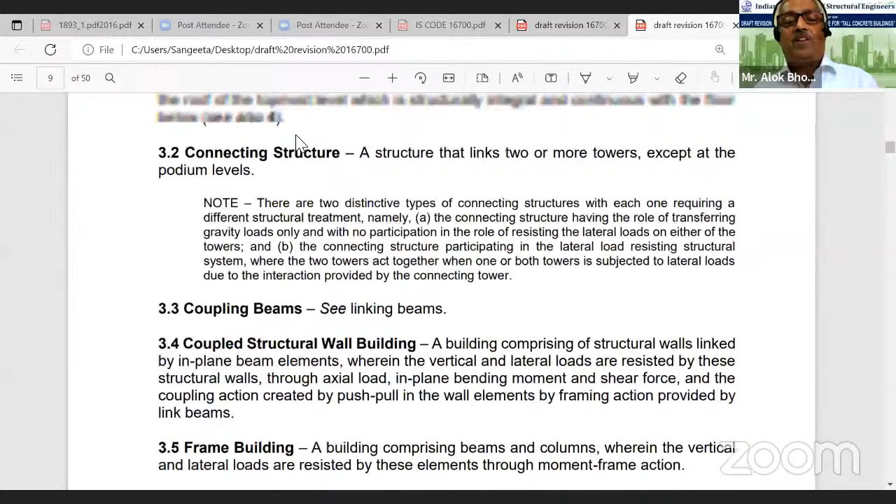Okay, so if there are no other points, then we can go to the next clause. Clause 2 and 3 are all terminology. We can straight away go to clause number 5, because clause 2 and clause 3 are all related to symbols and references, etc. So we can go to the operating clause, which is clause number 5. We have heard Professor Tandon on clause number 5 and 6, but if other panelists would like to share their comments on these clauses, then this is the time. And also I request all the panelists to kindly have a look at the Q&A box. If there are any relevant questions related to this clause, then maybe that also can be taken up by the panelists.

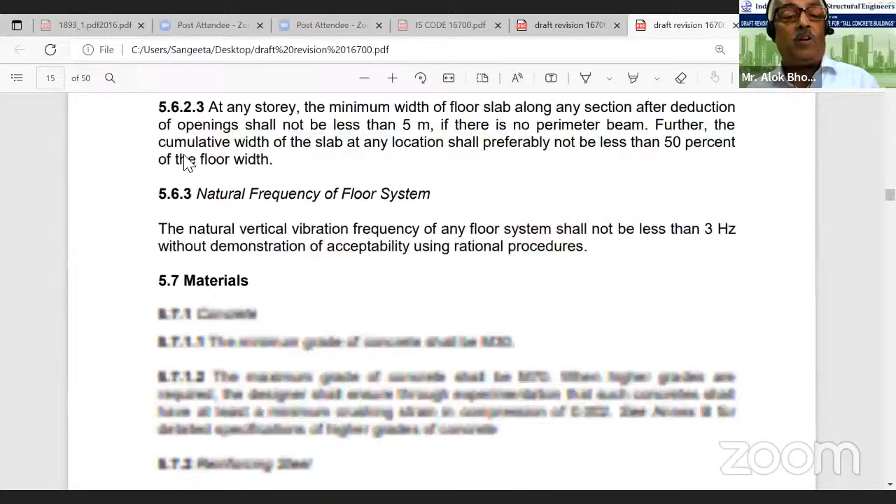Now let's come to clause number 5. I have one very minor comment on clause 5.7.1. Sangeeta, if you can just show that. 5.7.1 talks about the minimum grade of concrete, stated as minimum grade M30 and maximum grade M70. I have comments on both. In my view, M30 is too small a grade for tall buildings. The least I would expect is M35, not M30. And on the maximum grade, I don't know why we should restrict to M70 in today's scenario, when we are talking about 250-meter, 70-story buildings. Surely we can go for a higher grade of concrete, up to M80.

No, they have permitted higher grade, Alok, in that annex. They are allowed higher grade than M70. No, but with a rider. You see, that higher grade is with a lot of riders. Yeah, but my point is, they are allowed higher grade. In fact, the word maximum grade is a bit conflicting with Annex B. So it says over here in that clause, when higher grades are required, the designer shall ensure through experimentation that such concrete shall have at least minimum crushing strain. No, but in that clause, the second sentence is contradicting the first sentence.

No, the first sentence itself kills the second sentence. I think they are saying that the language maybe code writers can talk about changing the language, but the intent is very clear that when higher grades are required, then you ensure this, but if required more than 70, then you have this kind of condition, then your strain has to be.

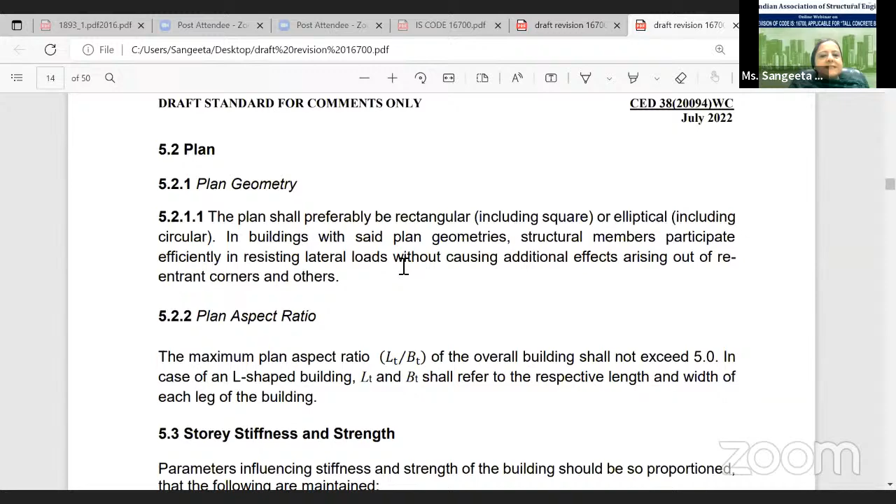This is happening, so we have to have some kind of clause where we make regular geometry mandatory, at least beyond a certain height.

I think we must not allow architects to take a flight of fancy and then put a noose around the structural engineer's neck. Anyway, I have a different view on this, because if you see the different kinds of buildings coming up all over the world, all these buildings are twisted with all odd kinds of geometry.

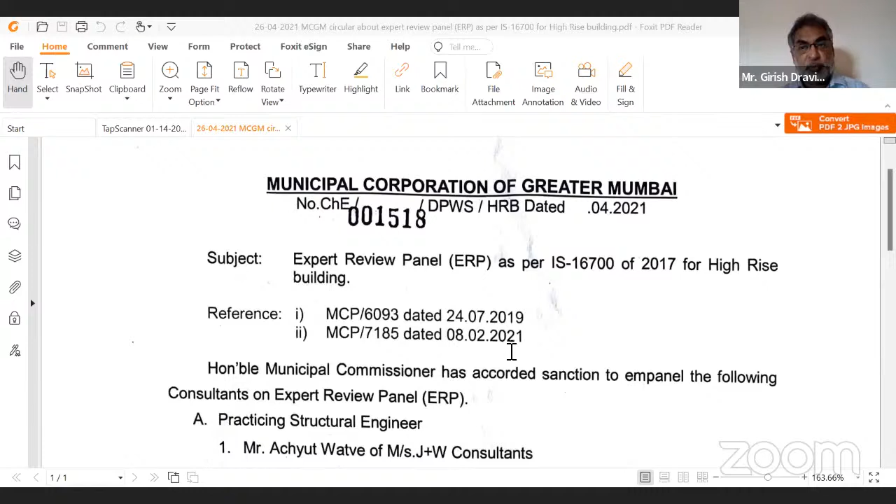So it all boils down to authorities. In Mumbai, we have a very strong association of structural engineers. We are all friendly and we take up issues with the municipal corporation. And you can see this GR.

This is from April 2021, and this is the expert review panel committee appointed by the municipal commissioner. All the names are there: practicing structural engineers, academic experts, geotechnical experts, base isolation and damper experts, other experts. This committee was formed in April 2021. I'm one of the members, as you can see, number 3, my name is there.

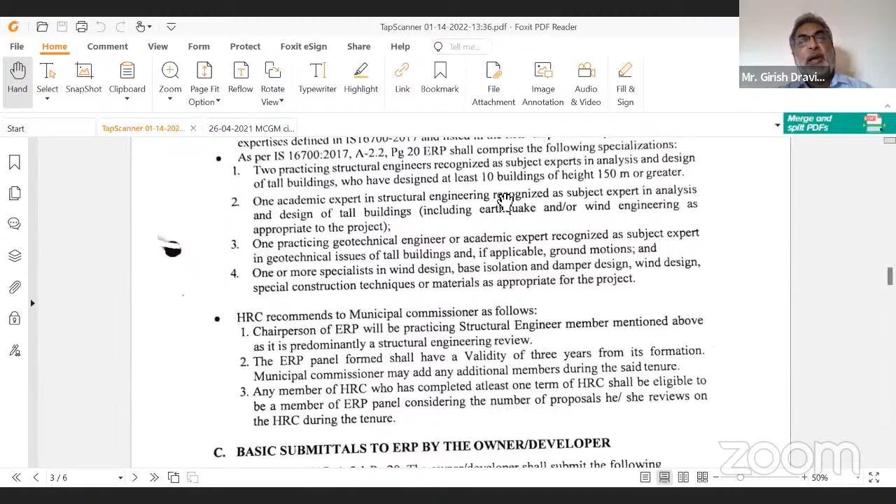We started functioning, and initially there were a lot of debates, but now we have formulated an action plan. Again, we went back to the municipal commissioner. Now, can you see my other document which I'm presenting? Yeah, okay, so there is a procedure set up.

So what I'm trying to say is our contention of architects not agreeing and all that is dissolved when this particular GR came in. The building proposal department asks the structural engineer itself to fill that checklist and asks whether that building is code compliant or not. If it is not, then by law, it has to go to the high-rise committee or expert review panel. This is the law in Municipal Corporation of Greater Mumbai now.

And we have started reviewing these buildings, code-exceeding tall buildings. Everything is written here, and this expert review panel originates exactly out of IS 16700. Now, every architect in Mumbai who practices in Mumbai knows about this code.

Even if certain aspects are beyond the code, there is a provision for reviewing by ERP. So we can have twisted buildings, inclined buildings. The code doesn't stop you from designing irregular buildings. It has to satisfy all the performance criteria. That is the whole idea.

So if Delhi or NCR goes to authorities, you people should go to authorities and tell them there is a requirement by this code to make it mandatory. Every architect, every MEP consultant now knows about this code. This is what I want to tell you.

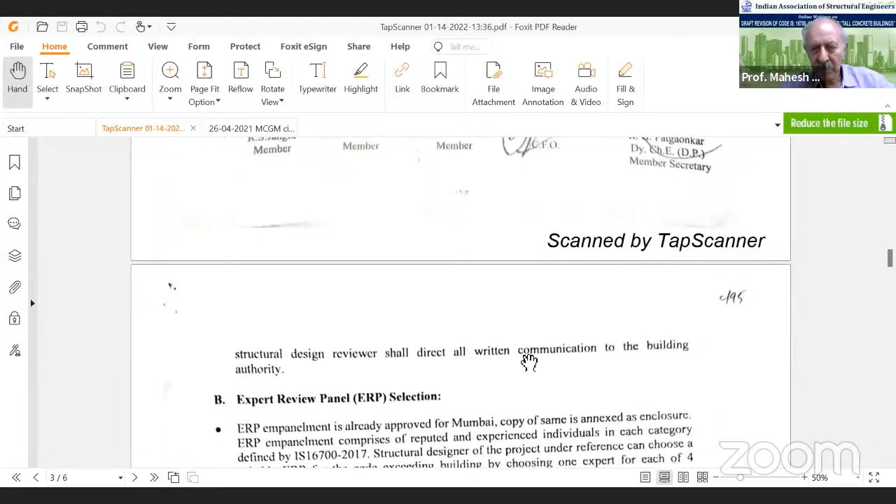Yes, Tandon sir, I think we are headed in that direction because... Take a minute, Vipul, just let Mr. Tandon speak first, then I'll come back to you.

What I think is what Alok said. Just to expand that a little, we cannot dictate where things have to go, and whether the municipal corporation will agree or not is a separate issue. But what we can certainly put here is that at the concept stage itself, coordination between the structural engineer and architect has to be there, and both have to sign off on some plans. If there is no coordination at the concept stage, before the architect has already placed doors and windows, he won't change it later. But if you tell him right at the beginning, there is a chance you may get some of your ideas through. So that is what we need to put in this code.

You can, of course, as a parallel action, go to the municipality and see whether they agree or don't agree.

See, we also need to have a panel in place. Vipul, you wanted to say something. Yeah, I said Professor Tandon is absolutely right.

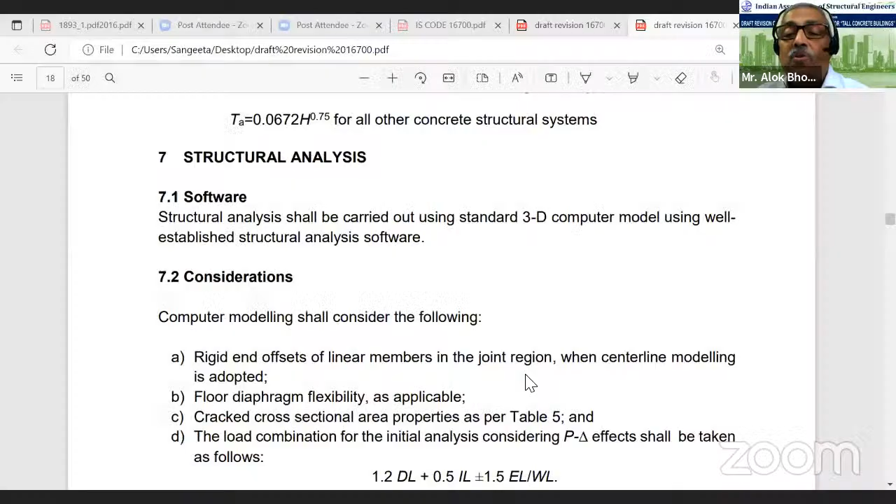Maybe it will take some time, I think, before the structural engineer will be. I think, Vipul, we have other clauses also to discuss. Let's move forward. We will come to annexure; when it comes to annexure, we can discuss this. But we are just at clause 5 only. So let's move forward. Clause 6, any comment from anyone in the panel? Alok, do you want me to share the screen? Yeah, kindly. Thank you. So clause number 6, if anybody has any comment,

loads and load combination. Okay. I only have a few comments, if you allow me. Then maybe clause 6.3.2. Clause 6.3.2, you see, there is a term: for building seismic zone 5, deterministic site specific design spectrum may preferably be estimated. I think this language 'preferably' in a code is not a good word, because either it should be done or it should not be. If you keep it preferably, then it becomes a problem. In my view, 'may preferably' can be replaced by 'shall be'.

Maybe Professor Yogendra Singh ji can comment on this. Yeah, I agree. One is the preferable, and another thing is this deterministic. Why are we insisting on deterministic only? Either we do not specify that site specific, or, earlier our code was deterministic, but now in the hazard section of our code we are moving towards probabilistic approach, and here we are insisting on deterministic. So that I don't understand. So that can also be pointed out by us, that this deterministic word should be either removed or replaced by probabilistic.

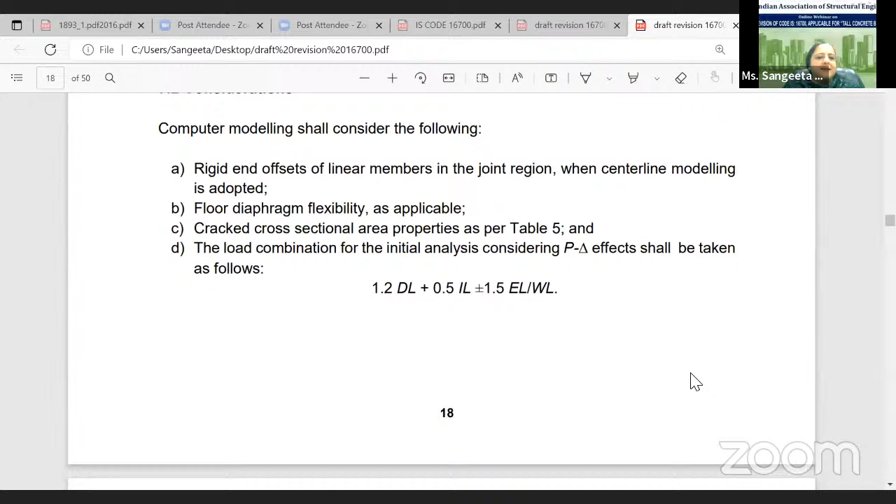I request all the panelists, whatever points they are making, if they can give them to me after this webinar, with all the clauses they are referring to, so that I can compile and put it to the BIS. Sure. So let's move forward.

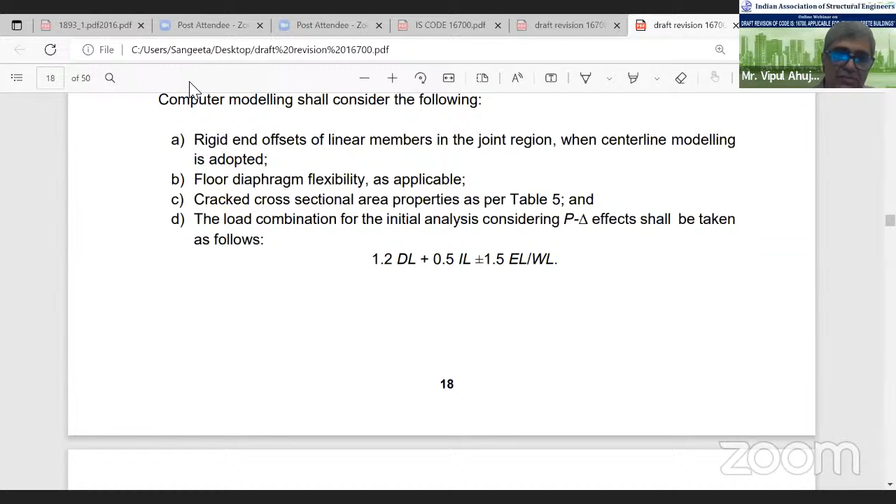Now in this table 5... hold on, please. One minute, I was not done with 7.2D. Let's go back. That equation says this load combination is for the initial analysis, and this is only when you're doing a static analysis. If you're doing a dynamic analysis, then you only apply the gravity load first. Correct me if I'm wrong, Professor Yogendra Singh. Otherwise, in a dynamic analysis, all the signs are lost.

Sorry, I could not hear, Mr. Ahuja. Can you come again? On this 7.2D equation, this is only for the initial analysis considering P-delta effect, and that too when you are doing a static analysis, because in a dynamic analysis all the signs would be lost. Signs will be lost, you mean the earthquake EL sign will be lost? Yes.

So for this initial analysis, you'll have to push the building statically one way, then restart the analysis and do the dynamic analysis. That will only be valid in that direction, that sign. But when all the displacement is in one direction, P-delta will be done in that direction. That will cause additional forces, and those will be added with both the signs. Will that not take care of it?

See, the thing is, if this is done for one direction, plus or minus, then that's the only direction for which the dynamic analysis will be valid. It will not be valid for the other directions.

Now, if I take a minus sign to all displacements, that will be valid in the other direction. No, because the building is totally asymmetric. What you are saying, that effect will come in case of nonlinear analysis. But as far as linear analysis is concerned, we multiply by minus, because the principle of superposition is valid. So if we multiply it by -1, that is a valid solution for the opposite direction.

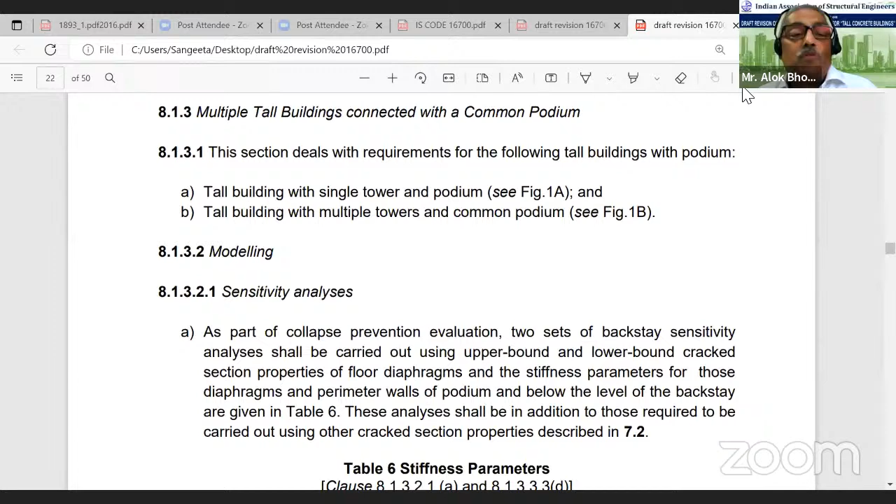So now coming to clause number 8, if there is no view from the panel, we can move forward. I had covered the staircase over here, 8.1.2, so those points have already been covered. Okay, so we move to the next one, which is foundation.

If you stop at 8.1.3.2.1, sensitivity analysis, there's an exception here as part of a collapse prevention evaluation: a tall building is evaluated for collapse prevention. I think this is the first admission we are seeing that the code mentions it is being designed for collapse prevention. Thanks for pointing it out.

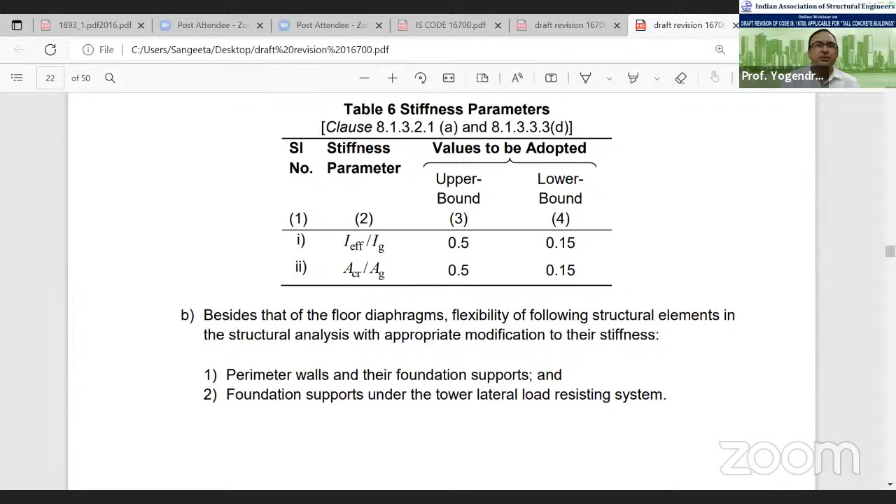So we go to the foundation then, clause number 9. I have one point regarding this design. Yes. Actually, our codes, IS 13920 plus 16700 put together, are lacking on the part of design of shear walls. Many things are missing which need to be added, which we can point out. So one thing is that they are reducing the thickness to 160 from the earlier one. It's not a good start, as Mr. Ahuja has also pointed out. So that is one thing. We should say that minimum thickness should not be reduced.

Secondly, our codes do not provide guidelines for capacity design of shear walls, which is another important aspect, which has been included now in ASCE as well as ACI 318 as well as Eurocode. So our code should also include guidelines for capacity design of shear walls.

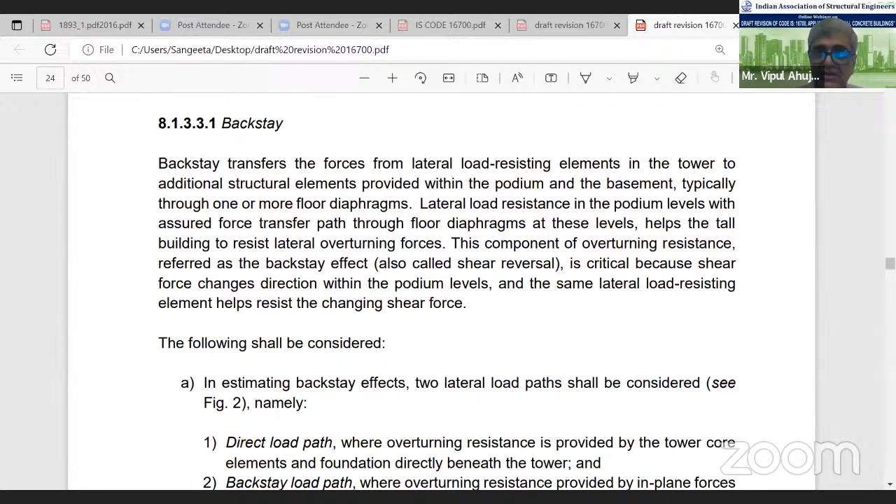Then design and detailing of different types of coupling beams. We have only one type of coupling beam at the moment, that is this diagonal reinforcement. So in different conditions, how different types of coupling beams are to be designed, that should be dealt with either in IS 13920 or in 16700. Especially steel plate reinforced, because the shear is very often exceeded, and then people start falling back on research and all that. So, okay. Okay. Any other point? Otherwise, we can go to the next clause.

Which one? I think if you look at 8.1.3.3.1, which is the backstay effect. And the same thing is applicable to these flat slabs. We are having an ostrich approach. We presume that flat slabs are not being constructed, or if those are being constructed, those are constructed as per our code. That's not the situation. So our code currently gives very little about design of flat slabs, and that needs to be extended. Yeah. A lot of guidelines are now available on design of flat slabs. So those need to be included. Yeah. Okay. Thank you.

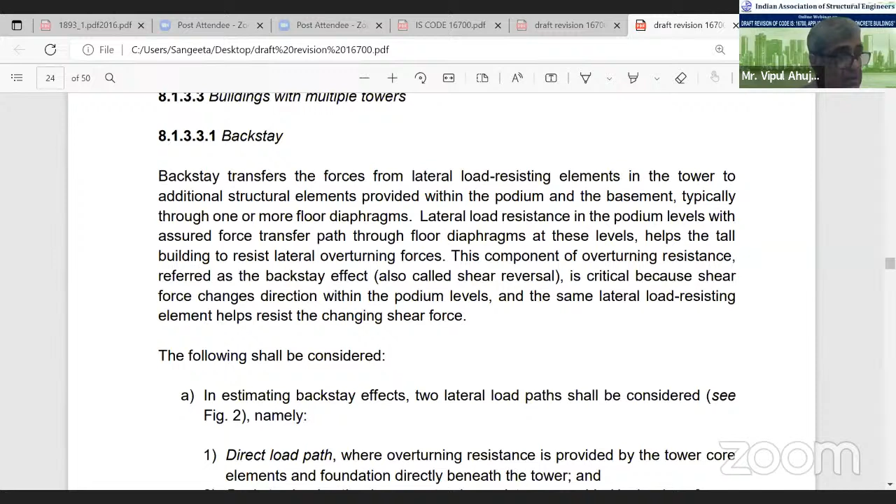Yeah. I think there's a very big and important section. There need to be some explanatory features. For example, if you go to subsection F, like father, and if you go to 5, it says adequate measures shall be taken to prevent shear sliding failure at the connections of diaphragms to structural walls. Here the inclination of strut shall be 45 degrees.

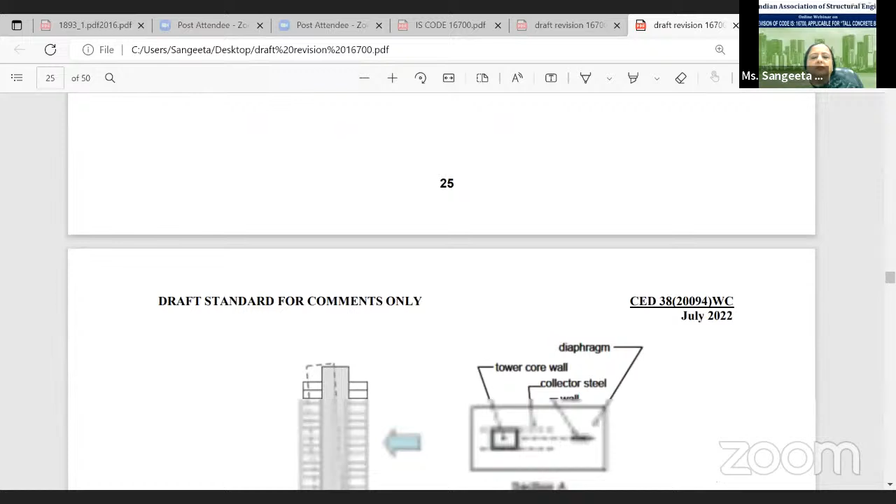Now, I think a picture is very important in this case, because people who don't realize what this is going to be, their imagination will be running wild as to what the code is trying to convey. And additional reinforcement shall be provided to resist shear force at the interface between the diaphragm and the structural walls. Nobody I have seen ever does any of this. And this must be explained with a sketch. Yeah. Okay. So can we move forward?

I think all these comments, I would request. 8.1.3.3.3, the one that you're on. In the next page, item C2. Next page. Yeah. C2, the equivalent static seismic forces can be used, provided they are scaled to match the base overturning moments obtained from the response spectrum analysis. Here again, a figure should be provided, and we are saying that it should be from the respective tower in the direct load path model. So this should be made clear. Okay. Okay, can we move forward?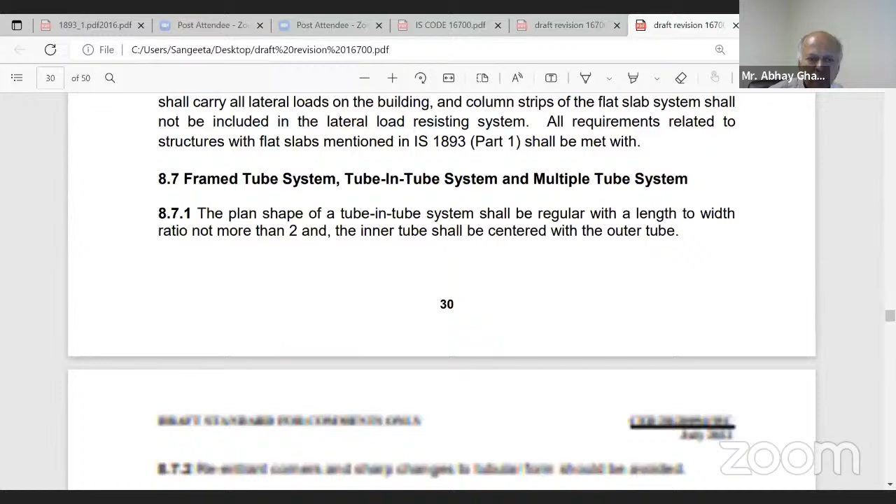Where do you want to be? 9. Foundation, yeah. Okay. If there is no other comment, I have one comment here. If you see 9.2, though it is not a change, it is there in the existing code itself, I find it is not correct. The language. It says a factor of safety of 1.5 shall be provided against overturning and sliding under A, unfactored design wind and gravity loads, and B, 2.5 times design earthquake load and unfactored gravity loads.

It gives an impression that when we are taking 2.5 times the earthquake load and unfactored gravity load, you are supposed to have a factor of safety of 1.5 over and above that. I don't think that is the intent. No structure can give you that kind of factor of safety. So I think the 1.5 factor is with A and not with B. Yes, I think so. That language needs to be changed, I think.

I think you can just ask them to review it, because I don't see anyone here in our panel from the 16700 committee. Is that right? Or Manoj, are you a member? No. So let us not presume anything on the intent. Let's just pass on our comment and ask them to review it. Just ask them to review it. Yeah. Next, you go to 9.3.

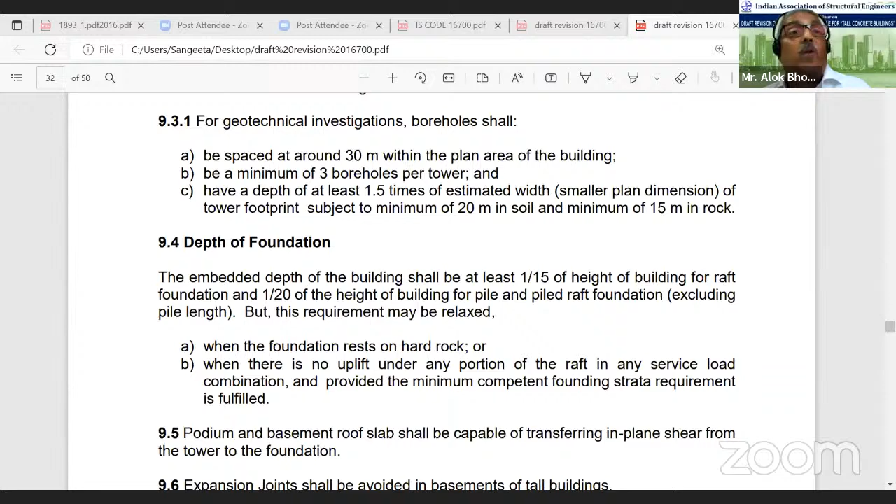So these are my observations. Regarding clause 9.8.1, if you see the criteria given, settlement may be relaxed to 125 millimeter maximum vertical settlement. If you really see IS 1904, which gives the permissible settlement, nowhere is there any allowable settlement more than 125. So where is the question of relaxation? I think this clause needs a review with respect to codes 1904 and 12070, and it should be more clear.

Okay, so any view from the panel? The bearing pressures below the raft - when there are maximums which exceed the allowables, what kind of averaging, what way the averaging should be done, should also be spelled out, because we don't go with the peaks. But a lot of engineers in the reviewing panel usually insist on going with the peak, and therefore that should be clarified in the code.

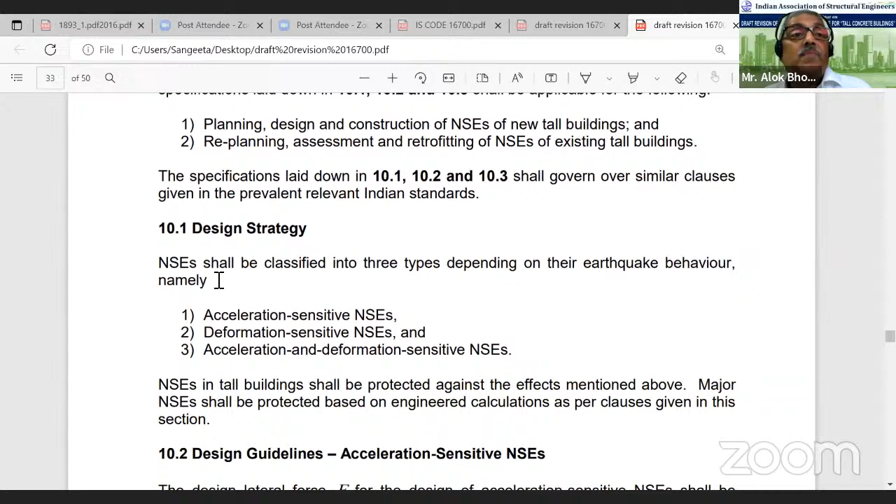Okay, so clause number 10 is non-structural element. Any view? In my talk I had expressed all that, and I think Mr. Dravid had also agreed with that. Okay, so we go to clause number 11.

Clause number 11 is on instrumentation - monitoring, recommendation for monitoring information and all. Yes, so any comments?

I have only one comment here. We are nowhere talking about the instrumentation or monitoring of foundation settlement or foundation behavior for tall buildings. Is it there? It is 11.3.1. Foundation settlement is there, in 11.3.2. One issue is that they have written triaxial accelerometer will be placed, but at which level, how many - that question is not answered. Also, why triaxial? Why not biaxial or uniaxial?

Triaxial will give us the three directions, but it is not going to give us the rotational, torsional behavior, so it has to be a combination. The word triaxial alone is not enough - it also needs to specify the location where these will be placed. Generally it is at the top and bottom - at the base it is triaxial, then at the top there are uniaxial or biaxial in two directions, so that at the two ends we get the torsional behavior also. So I think little more elaboration of this codal clause is needed, so that the designer does not use it as a black box - use triaxial anywhere, it doesn't matter. It is not like that. You have to have a proper instrumentation plan to understand what all you are going to measure.

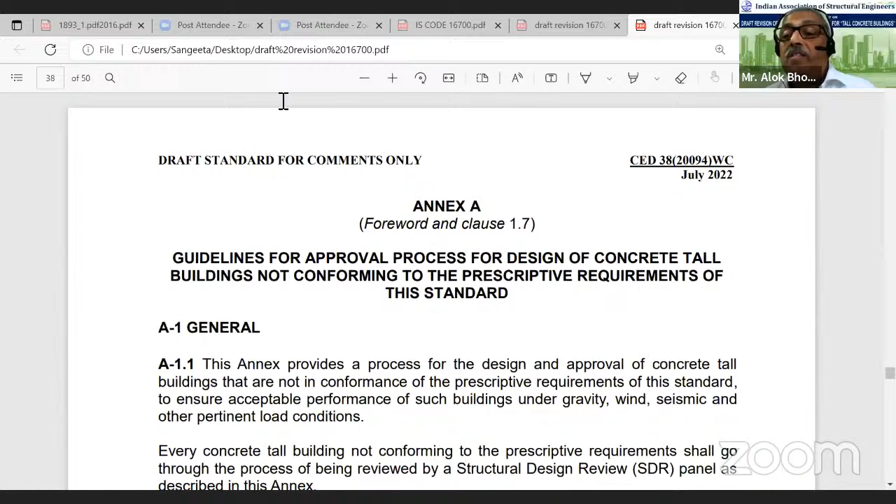Annex A is a very controversial annex, and I'm sure the panelists have something to say. A lot of things to say, I think, on this. So, Professor, you can start.

Okay, so the major issue here is that I was listening to the recording. I could not attend the live program which was done by the code committee, but I was listening to the recording of that program. And it appears that the confusion is there itself. It is not very clear what to do with code exceeding buildings.

One document which one of our panelists was showing from Bombay, there also it is mentioned that performance-based design will be done. But the question is using which guideline, which code, which criteria - that is not clear. This document also, at many places, refers to nonlinear analysis. Somewhere it has written performance-based design also. It talks about selection of time histories, which are required for nonlinear analysis only.

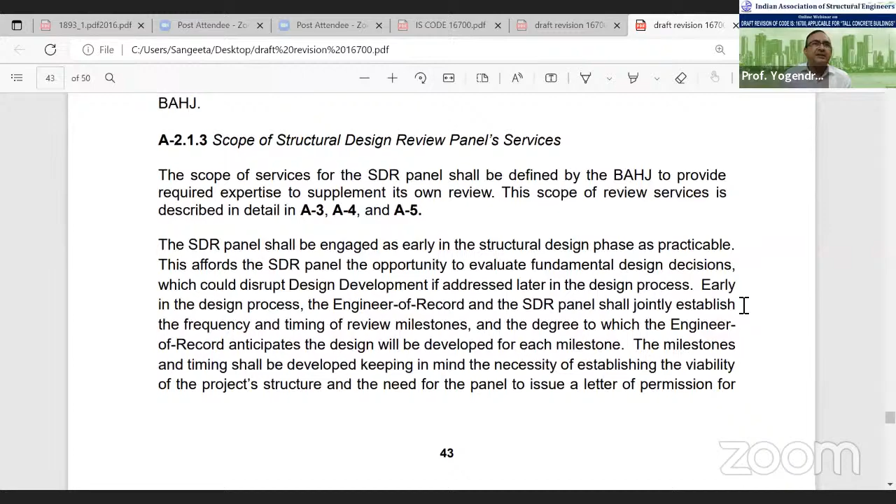Although the committee chairman had other views, let's not go into that. But from our side, at least we can send whatever we feel. Yeah, thank you. So, Professor Tandon?

I think this is an unprecedented step that this code has taken. There is no other BIS code, to the best of my knowledge, which has a provision like code exceeding, whatever it is dealing with. Why is it necessary to do that? What Professor Yogendra Singh just said - if we just allow people to do that, why do you have to make a panel out of this and all that? Then people will start doing all kinds of things.

As a matter of fact, there is so much confusion. There are contradictions between 1893 and 16700. It says that you can use this for buildings smaller than 50 meters. That itself is a confusion. So where is the question of going into this another panel and all that? I don't agree with this.

It is up to the municipality or owner, whatever, to get an expert to do the design check, as we would do if it is a bridge which has got some sort of unprecedented situation - there is no code available and yet you want to make it. They will find a specialist whose knowledge is more than the designers, and get it checked. I don't know why this thing is there, and why don't we have it in every code?

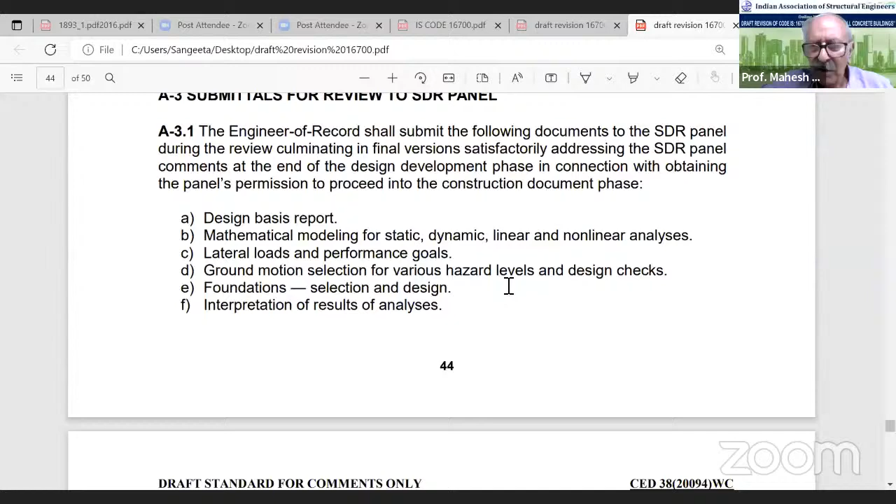No, it is very clearly mentioned here that the correctness of design - the responsibility of that lies with the main structural engineer. And the reviewer or the SDR panel will only be trying to safeguard the client's interest. So they are just becoming the super boss. They are just trying to be the super boss. So that's all.

I think there is a super boss required in India.

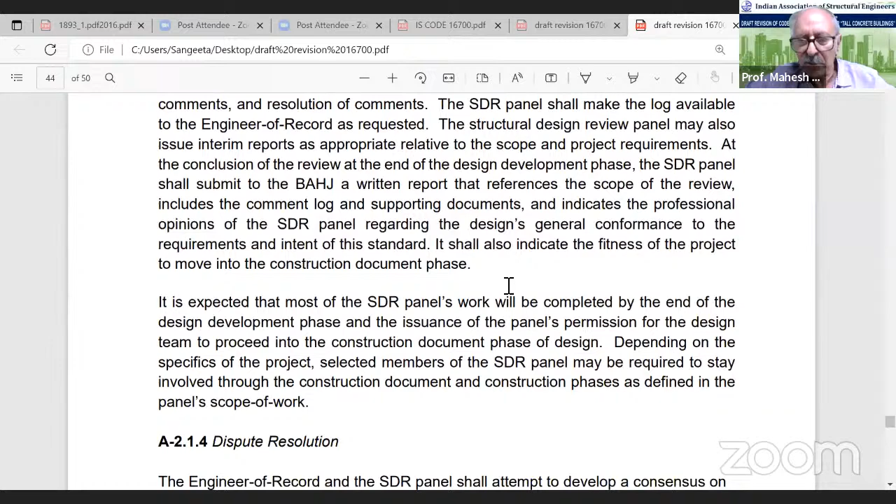Connected with that project, Sangeeta, for your information, in bridges, in NHAI, if there is a problem, everybody connected with that project is first blacklisted. You have to then prove who's wrong and who's right. But the reviewer of the design doesn't go scot-free that he has just checked the design and given his opinion. Well, I think it is very clear. All of us do understand that the main consultant cannot shy away from the responsibility of the structural safety. I'm saying neither can the reviewer.

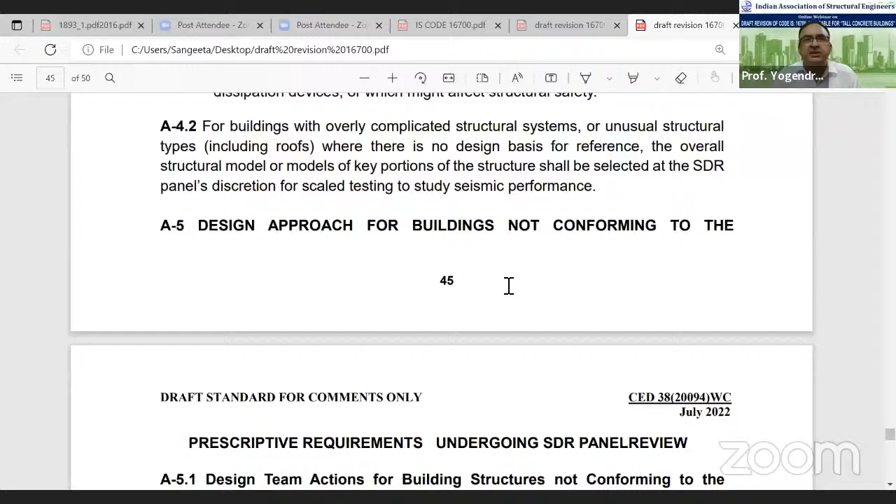No, I am not disagreeing with assigning some responsibility. There is a parallel code in circulation which is on designer proof consultant services. Yesterday only I read it. And there it has been specified that the proof checker as well as the PDC, principal design consultant, both will be responsible together. Right. So that is coming up. Great. We are deviating from our agenda. Our agenda is to suggest changes or comments on the code.

And what I feel is that this code is failing on this account at the moment, that it doesn't suggest what this panel will do. This panel cannot summon the god and ask whether this design is correct or not. They have to follow some procedure. That procedure is to be laid down. That procedure has been very clearly laid down. If you go through the annexure in depth, that procedure has been very, very clearly laid down. I don't see there is any ambiguity there.

Professor, I am of the view that this whole concept of Annex A and non-conforming building itself is fundamentally wrong. If you follow this logic, then in any code, you can always say that if you are not following the code, then you have an annexure and you appoint a peer review consultant, who will allow you non-conforming structures, whether it is IS. We cannot agree to that because I think it is wrong.

Alok, we have already gone to 6:30. We have to close it. Yeah, we have to close it today.

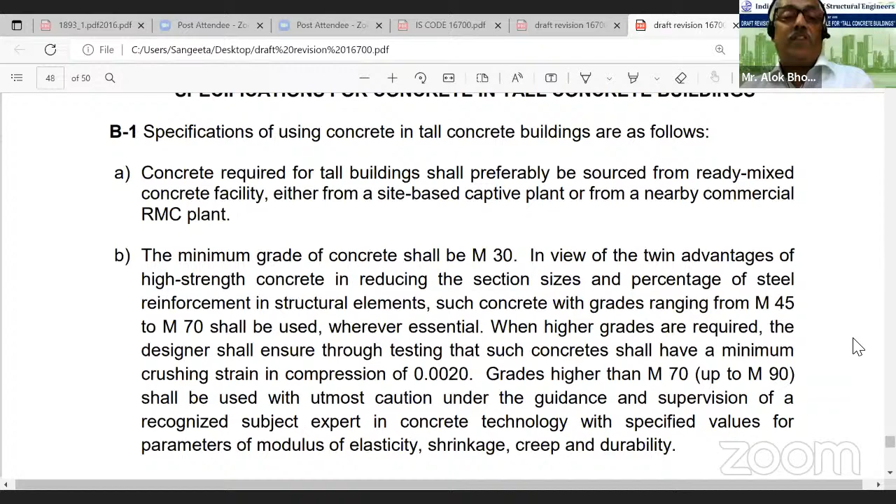Does it mention self-compacting concrete? No, it doesn't, I think. No, it doesn't. Then it should.

Actually, this clause already exists in the ACI code, and the Indian code also had a similar clause for foundations. You cannot have a foundation of one grade and a column of a different grade. And there also it was 70%. I think the clause is correct. I have no comments on that. Okay, we should thank everybody and close now.

The only thing is, Tandon Sahab, when you say self-compacting concrete should be included, if we use self-compacting concrete, is a shear wall thickness of 160 mm on the lower side or is it okay? No, I am not talking about the thicknesses. I am talking about, for example, what Vipul showed in a slide. I have seen that in aluminium formwork you can make something very thin, and that is how it should be in residential buildings. Partition walls should be only 100 millimeter thick. Why should they be more than that?

But to concrete a 100 millimeter thick wall with reinforcement inside is not a joke. It cannot be done by just increasing the slump. It has to be self-compacting concrete. Right. So the reason Vipul says 160 is too less and 240 should be there is the understanding that the concrete will not be self-compacting. Had it been self-compacting, he would have no problem with 160 mm. No, I think we have to discuss what the minimum thickness is. I'm just raising a point. Minimum thickness of a shear wall is another issue.